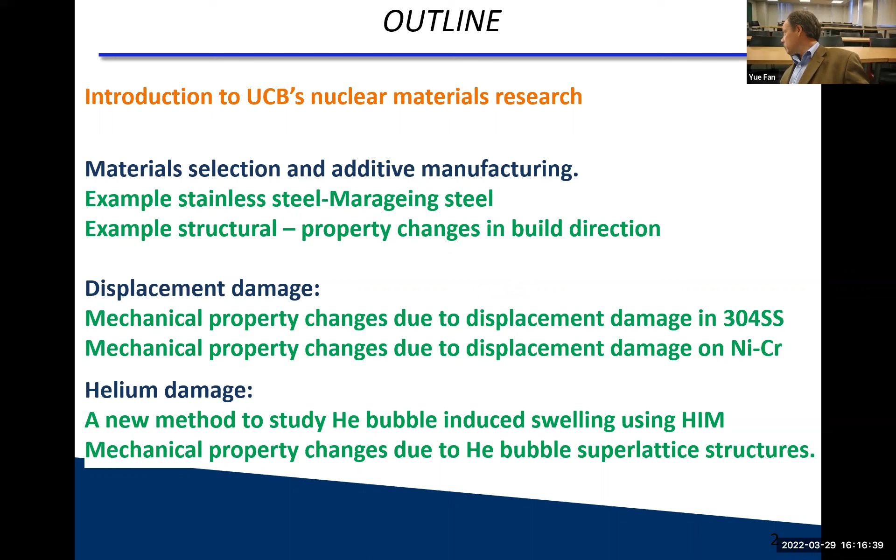So the Nuclear Engineering Department at Berkeley has this our faculty. We cover all areas of nuclear engineering, anything from thermohydraulics to neutronics to reactor design, and as well, of course, as materials.

Today we are talking about materials research in this session. Today I met with many faculty of mechanical engineering, nuclear engineering, as well as material science. So it was really a comprehensive day and meeting.

What we do in the nuclear materials section is two things really. We look obviously at materials in nuclear applications, but over the years we learned that what we learn from nuclear application has a lot of implication to non-nuclear things as well. So be it in the nuclear world, we work on materials for conventional reactors as well as advanced reactors.

But the material really doesn't care that much how it's used. And many lessons learned also go to non-nuclear applications, including composites for aircraft engines, since we have the same or similar composites for nuclear applications. Coatings for tooling are the same coatings people consider for cladding, and so on and so forth. So even plasma research you find in fusion actually finds application in semiconductor applications just the same.

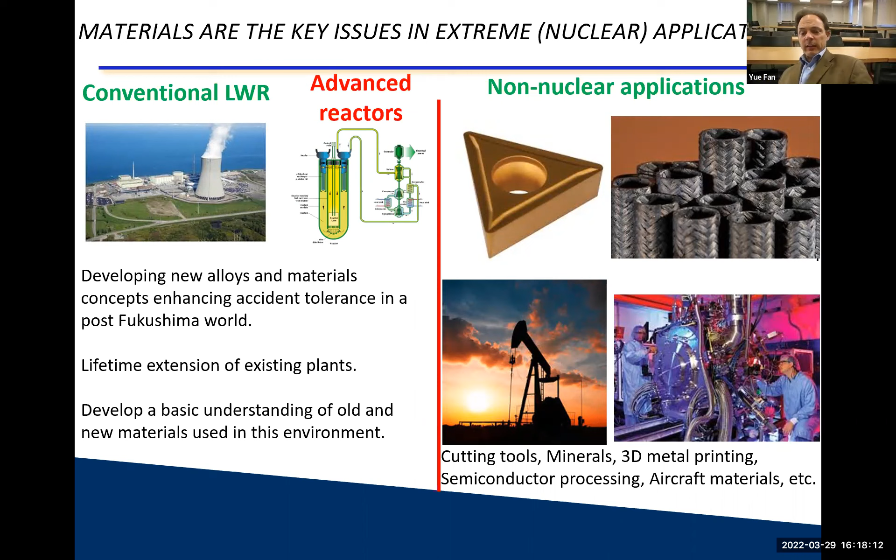So therefore, for us, it's really about materials being the issue in extreme applications. Harsh environments and the associated materials challenges need to be addressed.

Essentially, we say that every engineering design can only be as good as the material it's made out of. If you're a mechanical engineer and you don't have the right material to build it out of, your design will stay where you put it in the first place, which is on a computer or on paper, and it will never be realized. So you have to have the material to do that.

In my research team, we look at mechanical properties, environmental degradation, as well as fabrication and alloy development of materials. I'm going to talk a little bit about this first, because particularly here in mechanical engineering there may be some interesting takeaway things. But we also then look at changes due to temperature and radiation, mostly in regards to mechanical properties. I'm not going to talk about corrosion today, but if anybody is interested, we can talk about corrosion as well.

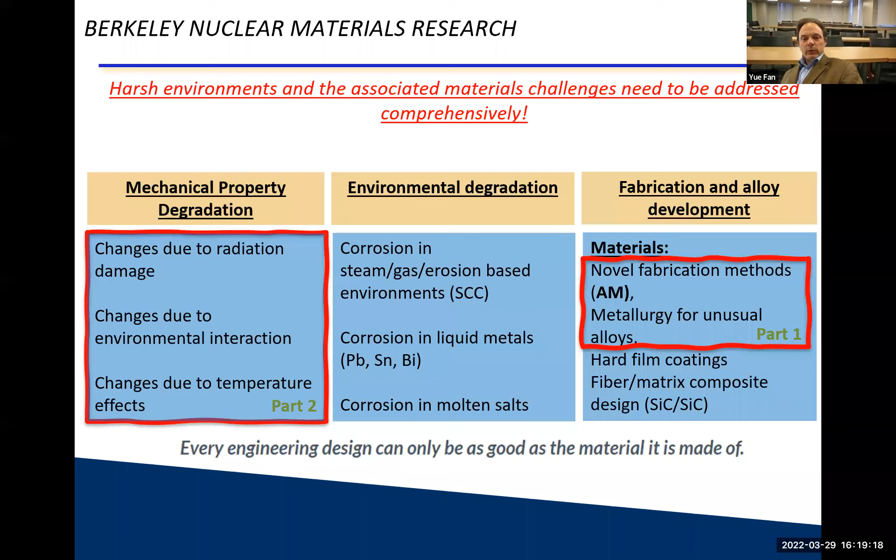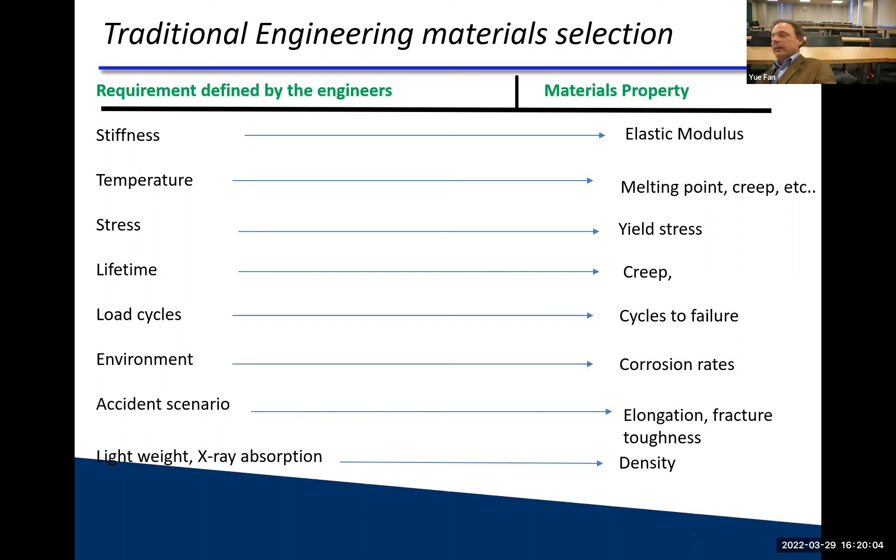Okay, so first chapter, so to speak, is materials engineering, material selection for nuclear engineering applications. So if you're a mechanical engineer, you start with your design, and you come up with a set of criteria: temperature, stiffness, whatever is your requirement, and you assign it a materials property - creep property, strength, elastic property. And if you're a mechanical engineer who is materials inclined, you learn that you can go to Ashby maps and select something of your liking that you think is appropriate for your application.

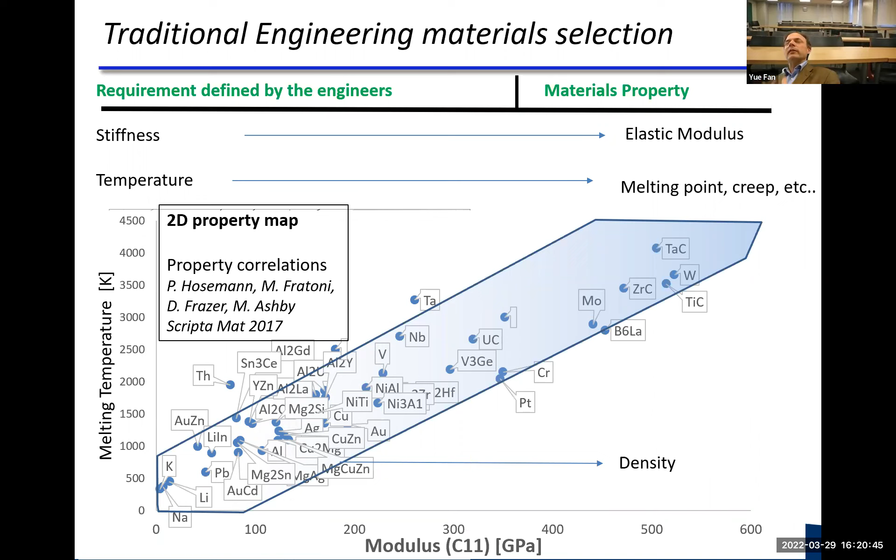If you do that and you plot interesting properties, what you find is many properties are related to each other. For example, melting temperature and elastic modulus are related, and there are trends along those lines - higher melting temperature usually means higher elastic modulus, etc. And that's not really a secret. But what is interesting is, if you're throwing in the nuclear application, you start to see that the intuitive relationship between these properties goes away.

So it's the same plot of various different compounds, and the size of the sphere now represents the nuclear cross-section. You can see there's no real trend anymore. The modulus and melting temperature still have a trend, but the nuclear property has no trend associated with any of the other ones. That makes it a little harder to do your material selection process.

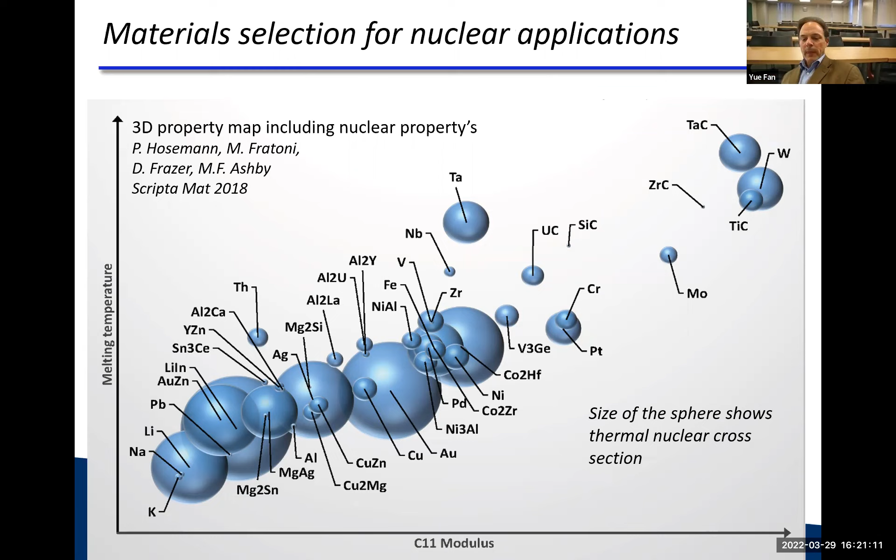So if you think about it in your application, particularly nuclear, usually you design for mechanical property, some chemical property - be it corrosion, you may design for physical property like density, or thermal conductivity maybe in reactors. Now you have to design for a nuclear property too, which keeps your design space very small. So you have a very limited design space in nuclear applications which fulfills all these requirements. Now that leads to the question: can you overcome this by maybe some creative engineering or creative manufacturing?

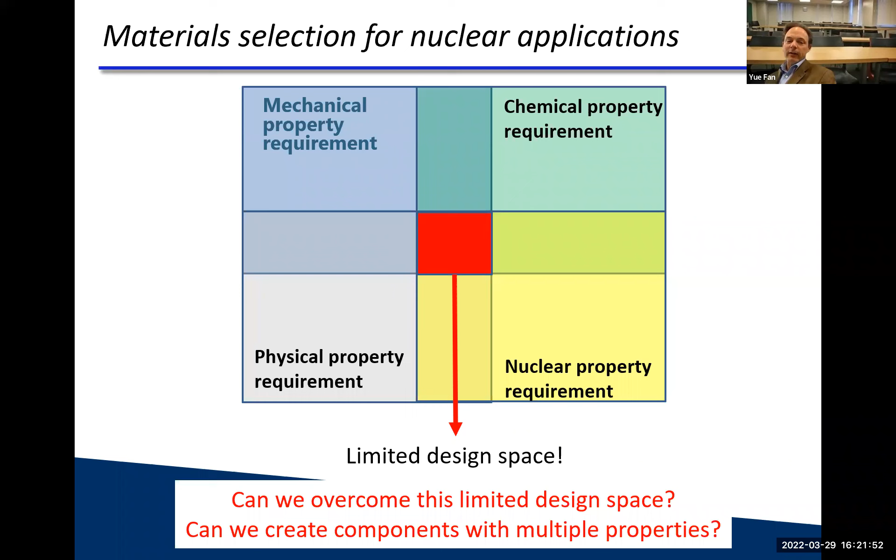As a first example, I want to show you - it's not that new anymore, obviously. As you can see, we started doing this in 2016, so that's quite a while ago. We look at 3D functionally graded materials - can you do 3D printing by changing the composition and the property at the same time? We borrowed this a little bit from welding, as most 3D printing does. So you have alloy 1 and alloy 2, and usually people make these dissimilar welds by building what's called a black and white weld, where you build up your transition. But can you do the same thing in 3D printing?

So here's a design of some part conventionally. Here's maybe a 3D printed version of this. But can you assign different materials and different properties to different parts of your part? And can you create, instead of 3D structures, maybe 4D structures by changing this material? And of course you can. So I'm going to show you a couple of examples of that.

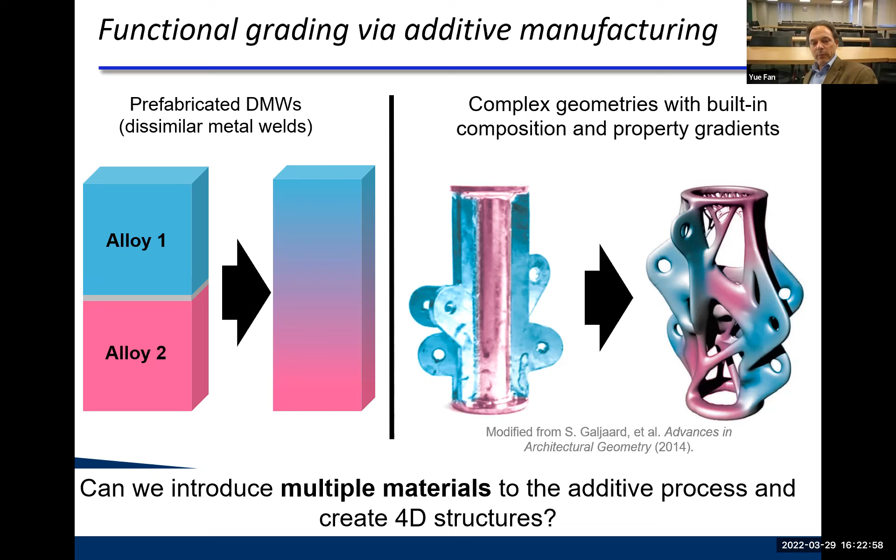The way we do that is laser 3D printing, where you have a powder feed and a laser, and you melt the powder as it comes on, and you build layer by layer. Can you change the composition along the way? Of course, your process parameters change, your materials powder changes, the chemistry changes, the geometry may change, the laser parameters may change - you have a lot of changes along the way. So you have to really figure out how to do that in this instance.

Here's a survey, and obviously I don't expect anybody to read this. It's from a review paper last year, where we plotted what people have done in the literature - austenitic stainless steel to titanium, austenitic steel to austenitic steel, and so on. All kinds of different materials plotted against all kinds of other different materials, looking at what gradients people produced over the years and where the pitfalls are. All these acronyms say that you may have poor solubility, which may lead to embrittlement, or a very different thermal expansion coefficient, which may lead to cracking, and so on.

So all these different material combinations have all their challenges. In our research, we focused on only a few of them, and I'll just show you one in the interest of time.

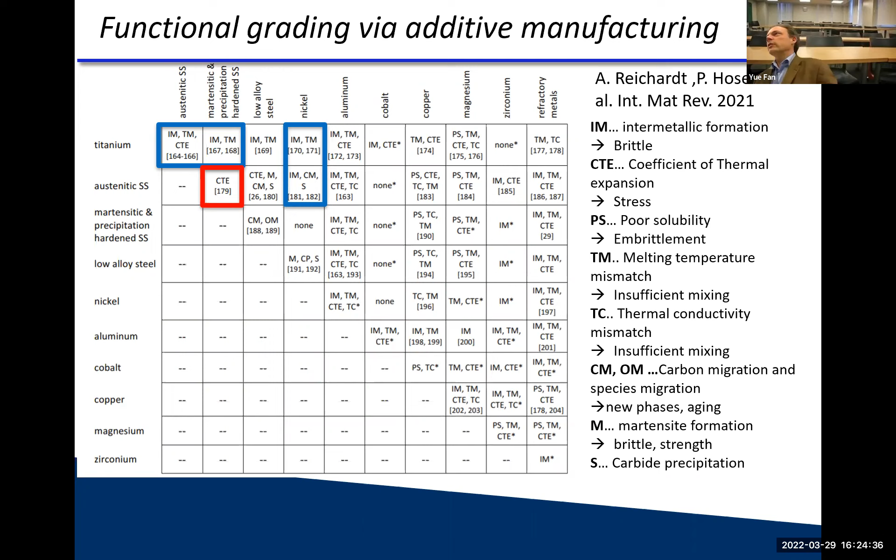I'm going to show you a martensitic precipitate hardened material joined to an austenitic steel. Mar-aging steel is a very strong, heat treatable material with around 2000 megapascal yield strength, while stainless steel is corrosion resistant but pretty weak.

So can you make a transition from one to another without too much trouble and use it for your design? That particular project was inspired by JPL, who were interested in doing something like that for space vehicles, because there's very limited space and you can't make too many connections. It's very interesting to see if you can grade something.

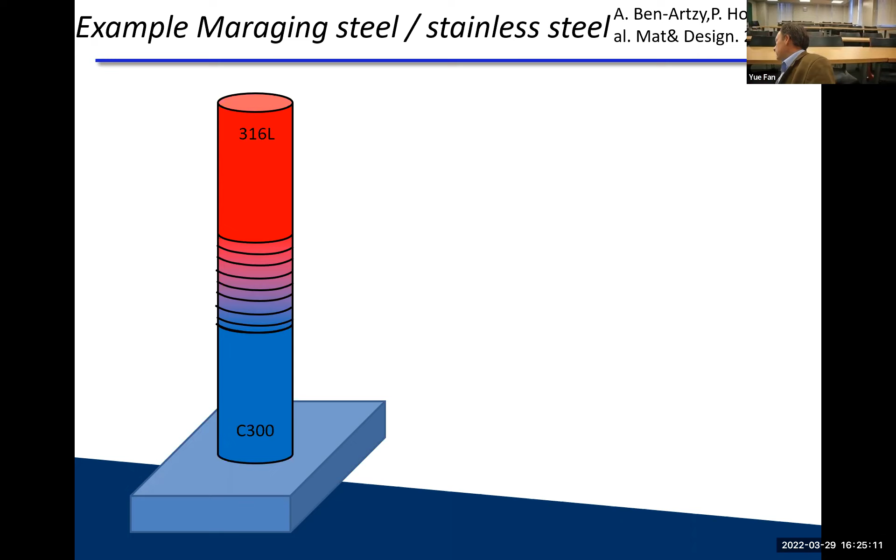So we printed mar-aging steel C300 to 316 stainless and did layer by layer a gradual change of the composition. As you can see, it's over 100 layers, and you change the composition along the line. The powders were pre-mixed, so the composition changes gradually. Okay, so far so good.

It's important to know what the phase diagram looks like when you do that, because you can end up with multiple phases potentially. Here we plot the iron, chromium, nickel phase diagram, and we want to go from a 316 stainless steel to a mar-aging steel. We chose a straight line.

Of course, you could choose other directions. You could increase the nickel content and reduce it again, or take some other path if you find intermetallics along the way. In the titanium world, that's sometimes what people want to do, to avoid intermetallics, but in this instance it's not necessary.

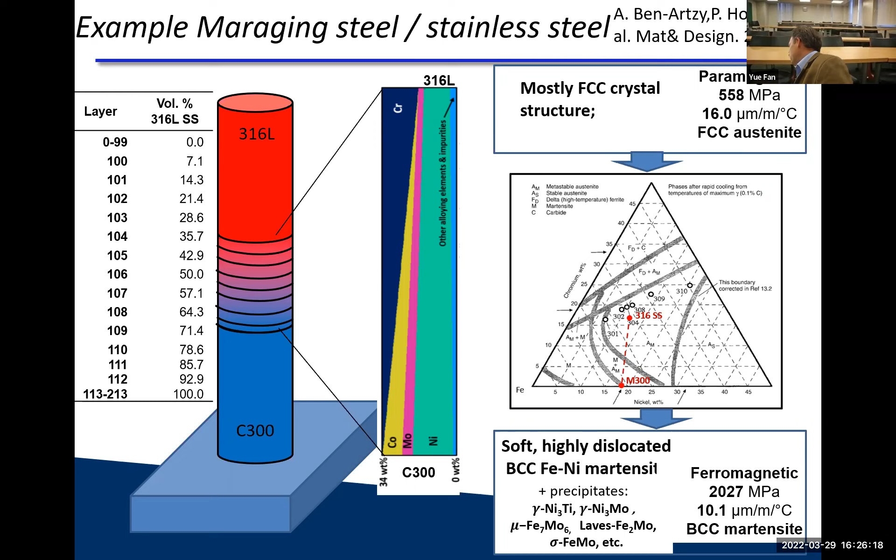However, you're still joining a very different FCC material to a BCC material, something with 500-something megapascal strength to 2000 megapascal strength, and very different thermal expansion. So it's a reasonably different material.

So when we print these things layer by layer, afterwards we do a cross section and look at the EBSD in this instance. Blue is BCC, red is FCC, those are the orientations. As one may expect, going from a BCC to an FCC material, you get a mixture of the two, and somehow in a gradual way.

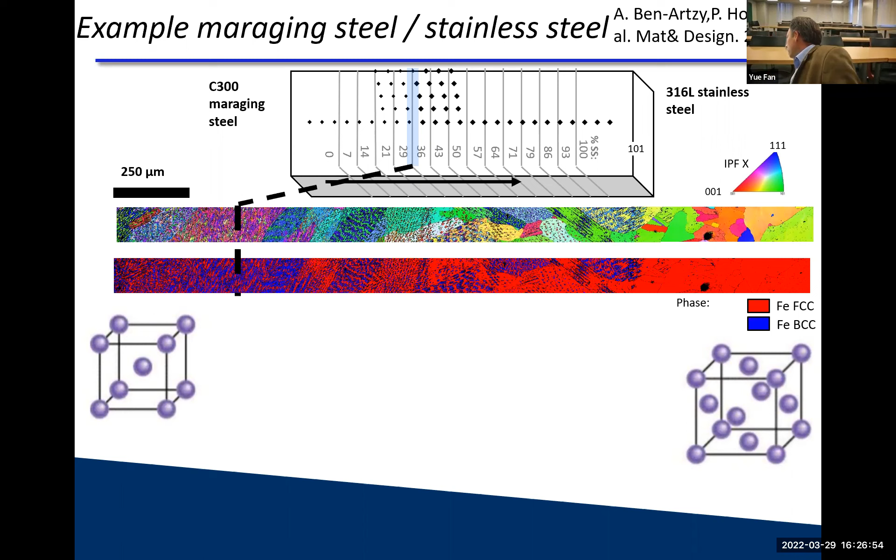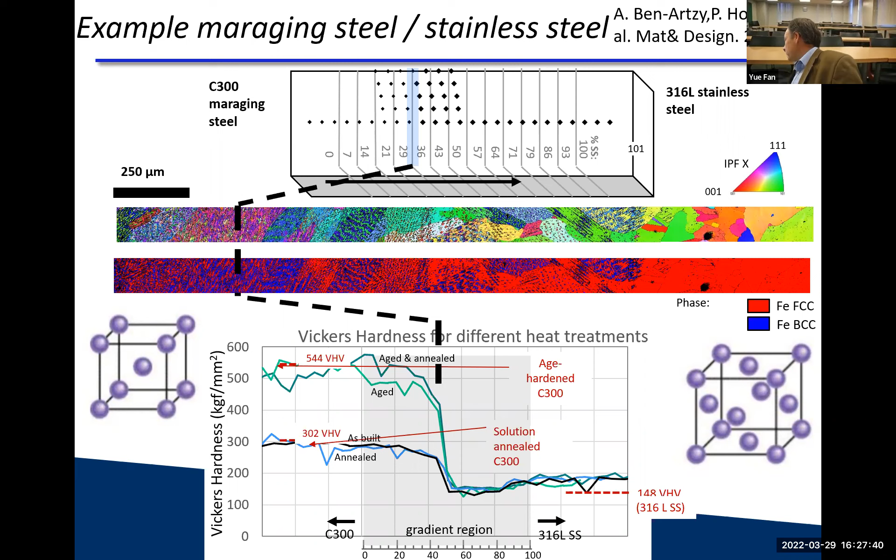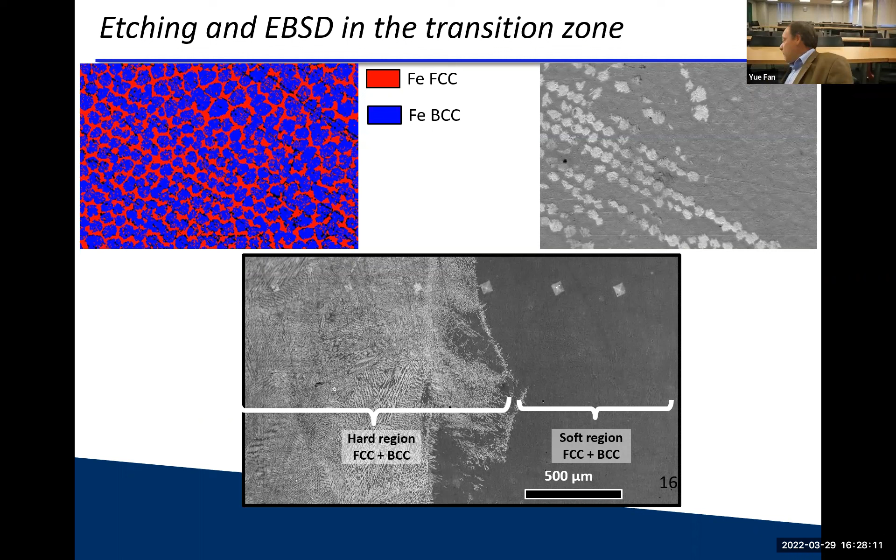In the TEM, however, we did see that in the hard region there are a lot of intermetallic precipitates, but not so much in the other region. So what seems to have happened is that in the hard region we form a lot of intermetallic precipitates that use up some of the alloying elements, therefore not contributing to corrosion resistance, which allows it to etch. Versus in the soft region, we don't form those intermetallics, and therefore it also doesn't etch because it stays in solution.

So that's one example where, when you set off to do a gradient, you have to be really careful that the gradient is indeed a gradient and not a sudden transition in some way. That's something to keep in mind when you're doing this kind of grading.

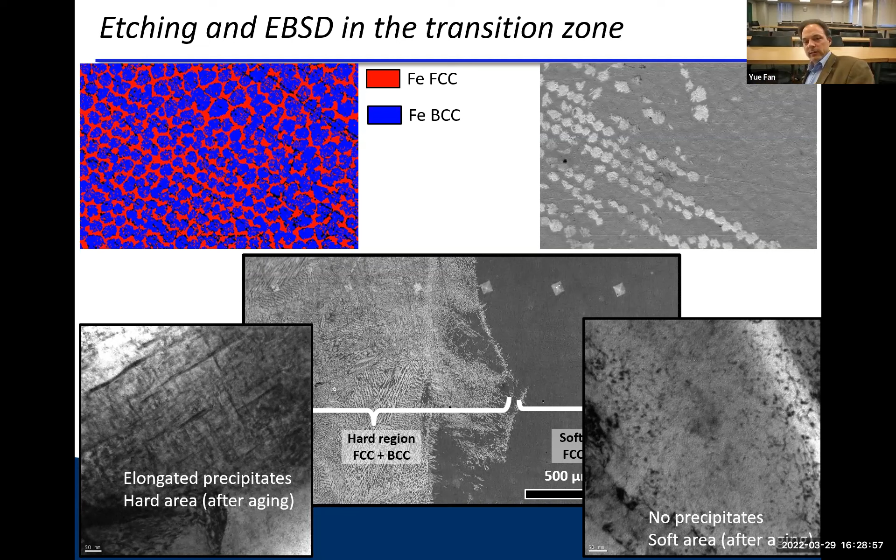Okay, second example on 3D printing is also a gradient, but in this instance it's a structural gradient. We look at P91 or T91 ferritic martensitic steel. When you build something, you have a bottom part, a middle part, and a top part, built layer by layer, as we showed earlier in this cartoon.

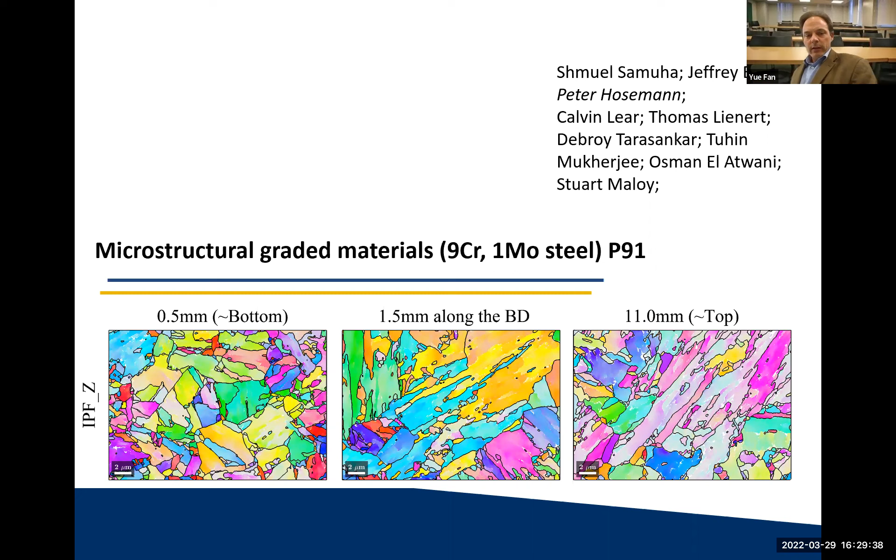This is the EBSD. Doesn't look terribly different—maybe this has larger regions and this has smaller regions, something like that. But there's a lot of stuff happening within these regions. They're not particularly homogeneous; there's a lot of structure in these things. So let's look at that.

Professor Debroy from Penn State did a beautiful modeling where he let the laser beam go across, calculates the thermal temperature as a function of where the laser beam is, and then calculates the thermal history layer by layer. Remember, you do layer by layer, so the next layer treats the layer underneath, and the next layer treats the two layers underneath, and so on and so forth, and they see different thermal history.

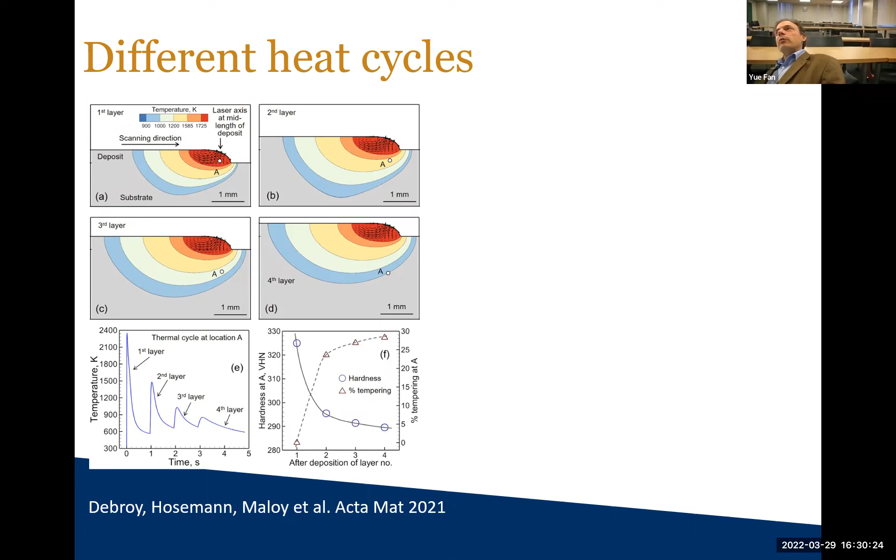And so now, because you have different thermal history, you also have different heat treatments for these heat treatable steels. Therefore one would expect a gradient of some sort with different heat treatments from top layer to bottom layer to change the property. And so this is the product, layer by layer.

What's interesting is if you look at the top layer versus the bottom layer, we see a very different yield stress, ultimate tensile stress, and yield stress change as a function of which layer we're looking at when you do tensile tests along the way. The top one has only seen one heat treatment, maybe two, and the bottom ones have seen many, many heat treatments.

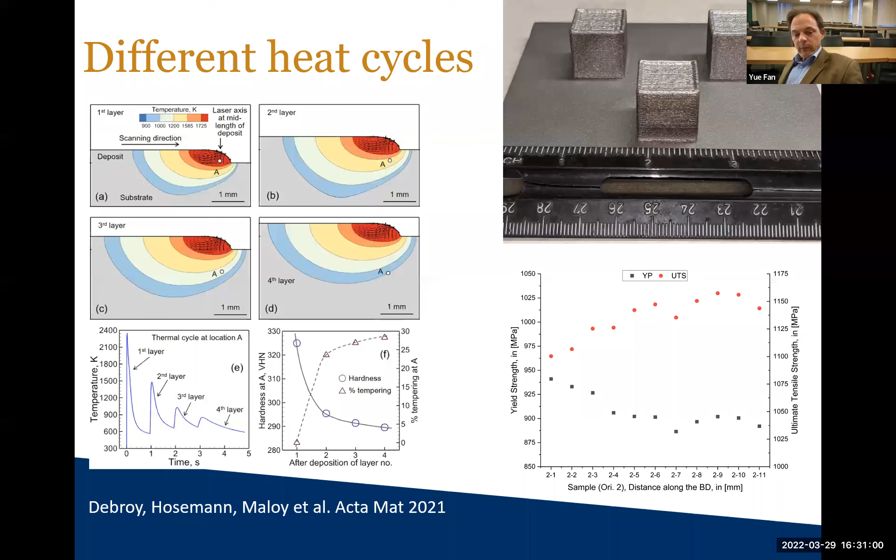So that's it. The question then is, okay, what does the microstructure look like? Shmuel, a postdoc working with us, is really good with EBSD. So he records all these different layers, the EBSD microstructures, and uses them to calculate packet sizes, grain sizes, and other microstructural features from the EBSD.

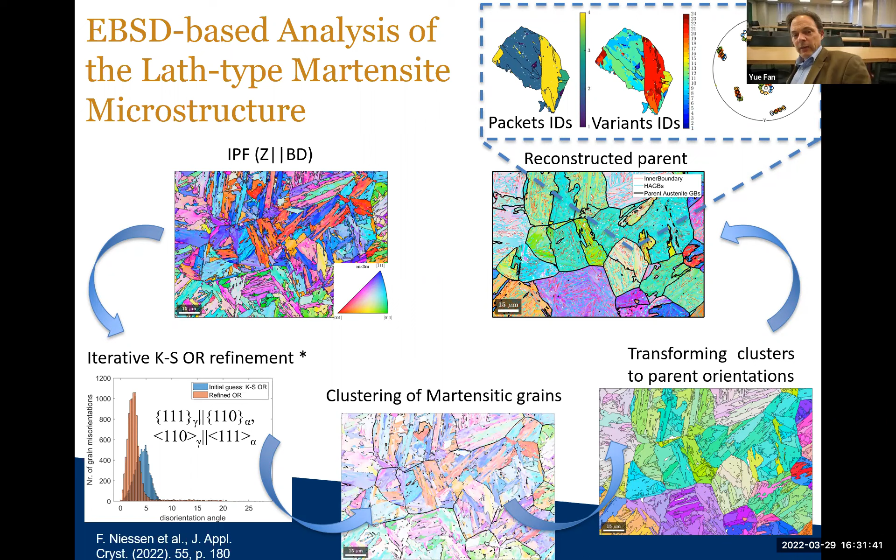He calculates the cluster densities, the lath dimensions, all these things, and can reconstruct what this microstructure looks like when you actually deconstruct it into grain sizes. What you can also get out of this is the geometrically necessary dislocations in these microstructures. What we see is there's a delta ferrite grain or phase here at the martensitic phase.

All the red here is the highlighted dislocations. Now what you can plot is the dislocation density as a function of distance along the build direction, but also the tested yield stress. Of course, if you have a higher dislocation density, you get a slightly higher yield stress, and so on.

Now, of course, you have to consider how much delta ferrite phase you have and what the rest of your microstructure looks like. If somebody wants to see the rest of all this put together, I can show you this later, but it's really remarkable that as a function of build layer, you can change the microstructure, get different properties, and control that in a targeted fashion.

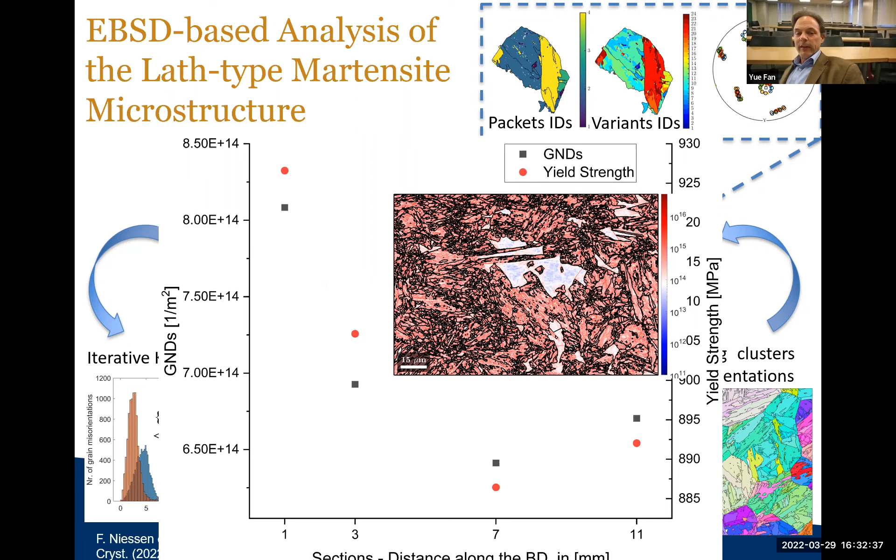All right, with this, I would like to stop with the additive components and talk a little bit about radiation effects in materials and mechanical properties.

And I'm rushing for people who came later because we lost 15 minutes at the beginning due to computer issues. So, all right—let's look at materials in the nuclear environment.

Again, remember what we said earlier, that this is an extreme environment—it's a coupled environment. It's not just radiation; it's mechanical, temperature, and these other things as well.

Your energetic particle comes in, displaces your atoms, and then you create knock-on cascades, which displace all the other atoms around. Of course, most of those atoms jump back at the end of the day, and you have a sort of healed lattice. But you did have these atoms being displaced, and therefore the dose we use to characterize nuclear materials is displacements per atom—the dose unit.

So at 1 dpa, 1 displacement per atom means that every atom on average has been displaced one time from its original lattice site.

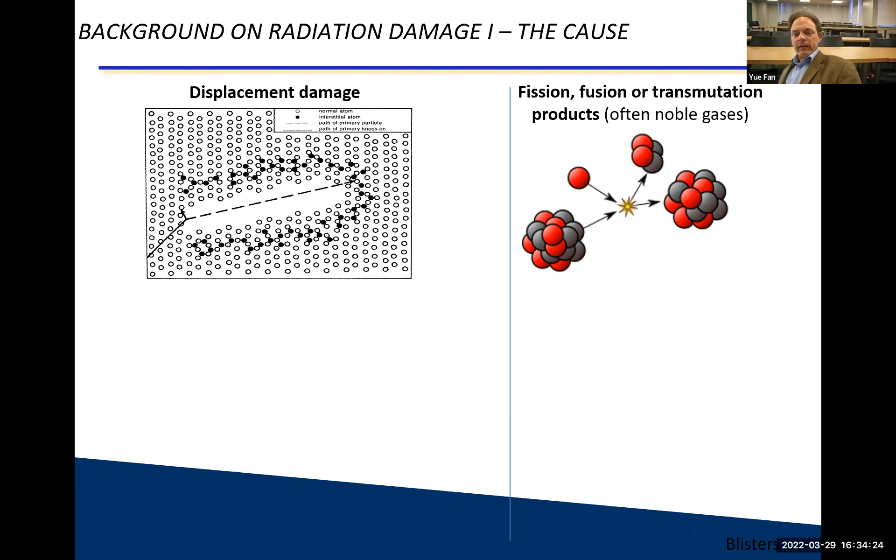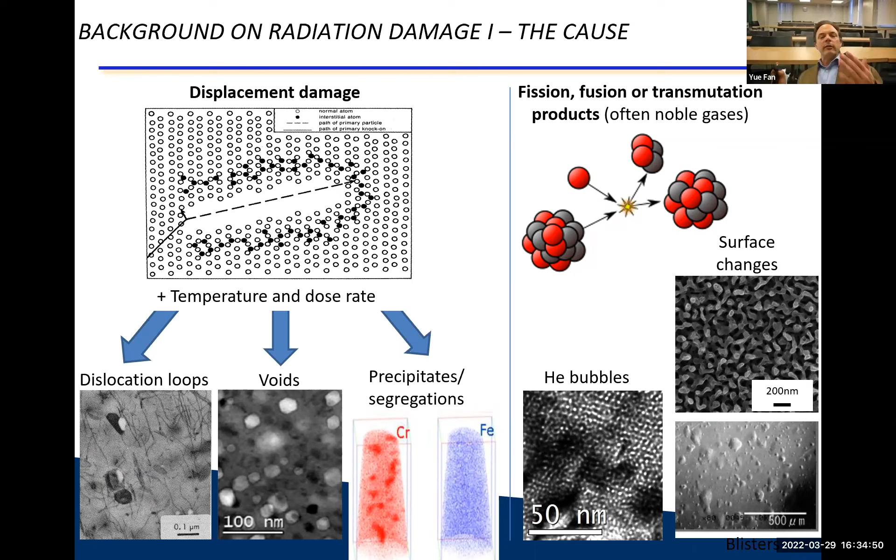The displacement damage leads to dislocation loops, maybe voids, maybe segregations, precipitates forming, these kinds of features. Versus transmutation products or gaseous products oftentimes can lead to, in the fusion world, fuzz formation on the surface, or helium bubbles building up in the material, or blisters forming underneath the surface. So those are very different phenomena that can happen, right?

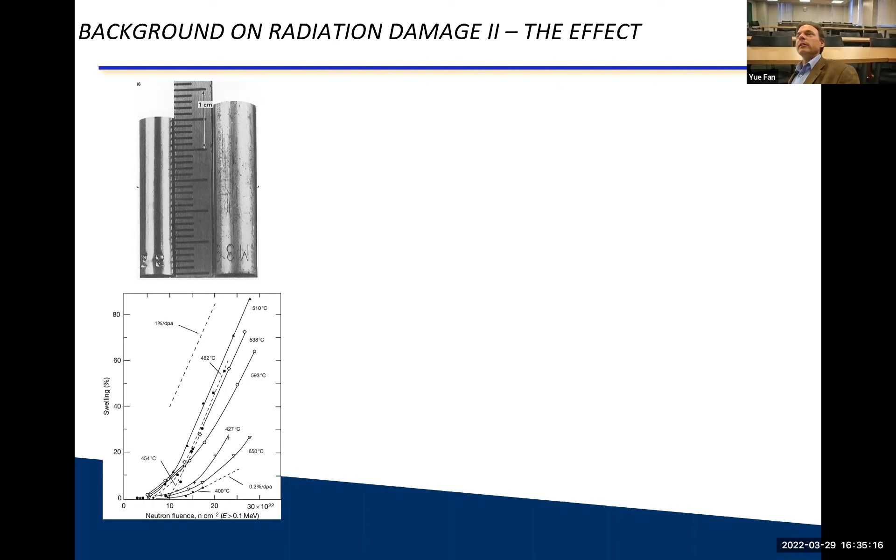The result of this is that your material may swell, so you can have a volume change before and after radiation, and tens of percentages can happen. Of course, if you have a component, imagine a screw or a bolt that changes its length and diameter just dramatically, that's awful. You can have cracking.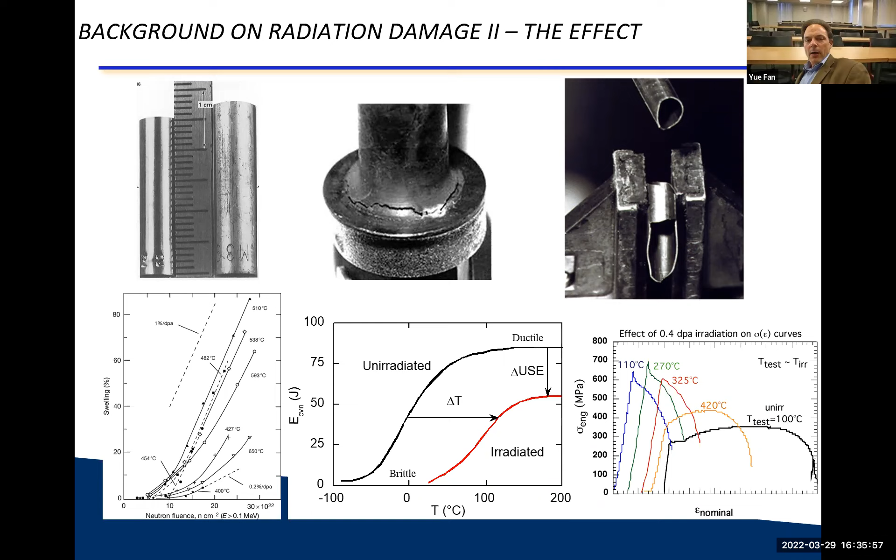So those are the effects of this. And the cause of this, as I mentioned, are loops, voids, stacking fault tetrahedrons, precipitates. Sometimes you can also get the dissolution of precipitates. When you have strengthening phases like gamma prime, gamma double prime phases, when they get irradiated, they can disappear under dose, so you can actually shoot them back into solution.

So you can actually have both, the formation of precipitates as well as the dissolution of precipitates, and helium bubbles. For the remainder of this talk, I'd like to separate defects into ones that may be dissolved by mechanical deformation and defects that usually won't be dissolved by mechanical deformation.

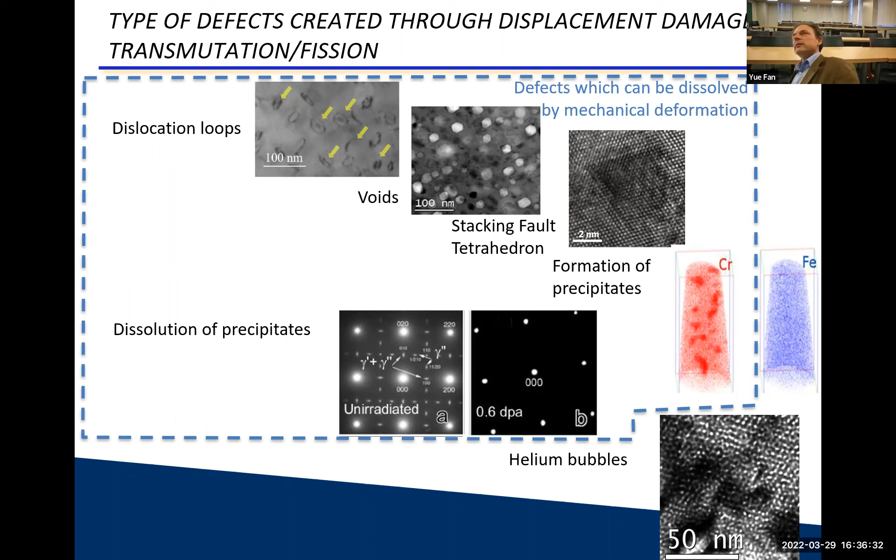So a stacking fault tetrahedron, if a dislocation loop is there and a dislocation comes, they can be absorbed by those. That leads to different mechanical performance than, for example, helium bubbles, which may change their structure but won't actually get dissolved.

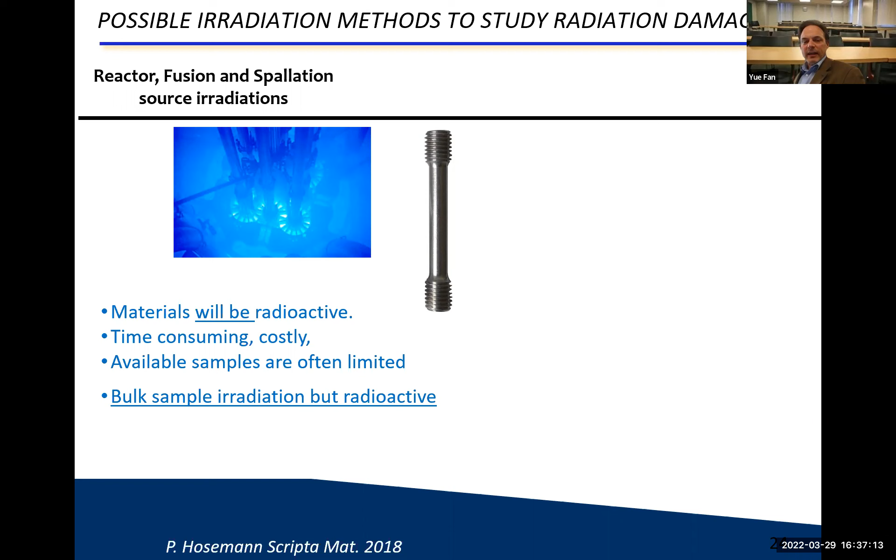Now, when we have our material, we want to irradiate it. Usually we have two ways to do this. We can either have a reactor irradiation, which leads to macroscopic dog bone samples and what have you. However, they're going to be highly radioactive, and therefore we would like to do smaller samples to keep it safer.

But we can also do ion beam radiation. You have, of course, one of the world's premier ion beam facilities here, I'm well familiar with this. With ion beam radiation, your penetration depth is limited, so you have to also go to small scale mechanical testing, because otherwise you can't test the material in that volume.

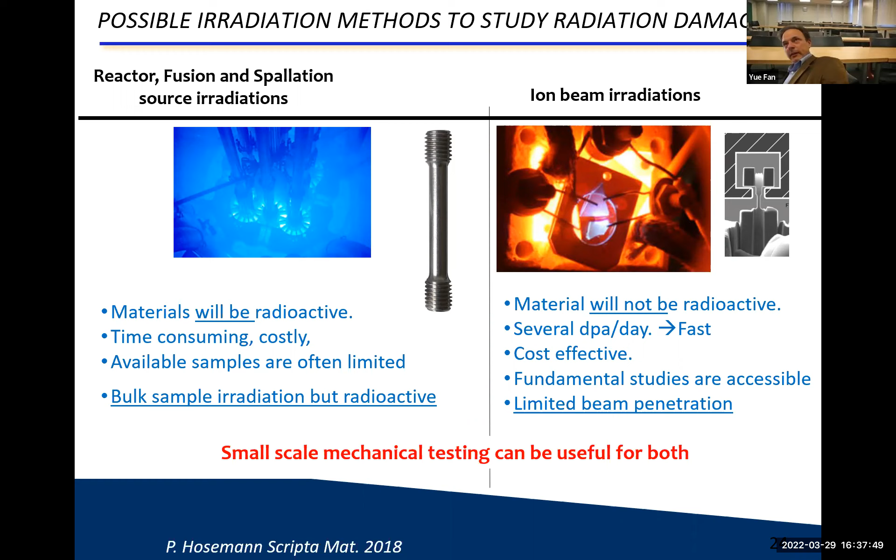In either one of those applications, small scale mechanical testing can be useful for both, and so I'm going to show you examples of small scale mechanical test data of these phenomena we just discussed.

As the first case, I'd like to talk about radiation damage on 304 stainless steel. In fact, that sample was irradiated here in Michigan and was studied in Berkeley. It was irradiated with 2 MeV protons, which penetrate about 20 microns deep into the material. Here's the dose profile shown, and where the protons end up at the end.

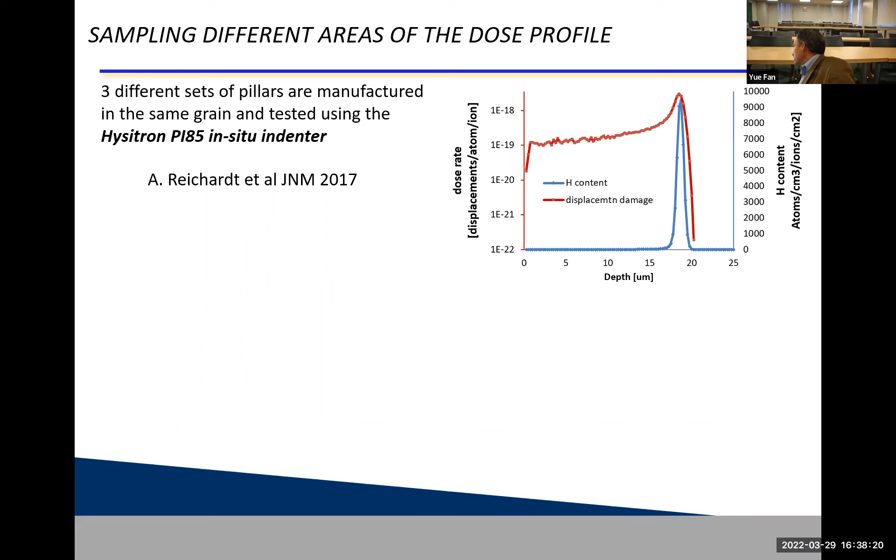So 20 microns is all the material you have to work with. The beam came from this direction, and this is how deep it penetrated. We looked for a large grain which can accommodate many mechanical test samples, so each test pillar in this instance is in the same grain as its neighbor, so orientation doesn't matter, it doesn't play much of a role in this instance.

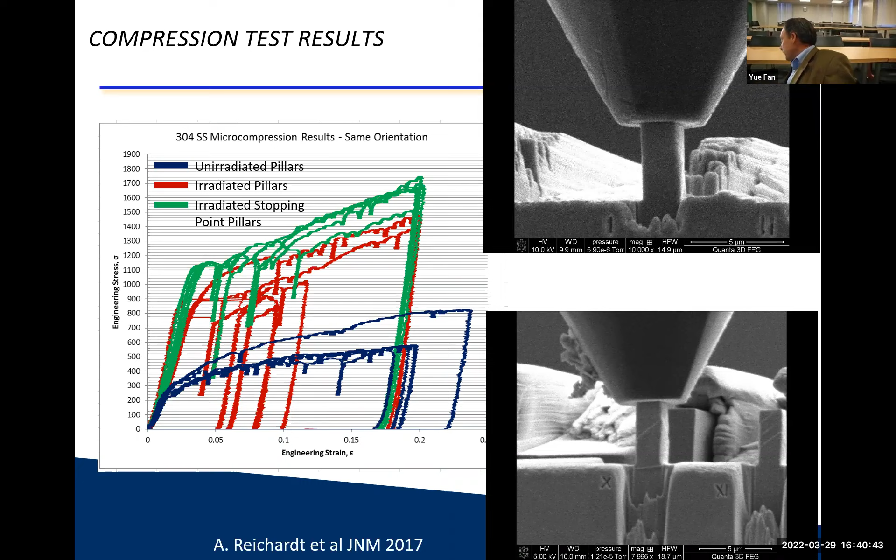So we look at not irradiated. In the not irradiated case, we see many slips, all parallel, since it's in the same crystal. But in the 10 dpa region, maybe one, maybe two of these things, and all the deformation happens only there. It's one clear shear. In the stopping peak region, we see a little bit of both, but our stopping peak is 1 micron wide, and the rest of the pillar is like 2-3 microns wide. So it mixes both. Unfortunately, it's not that localized.

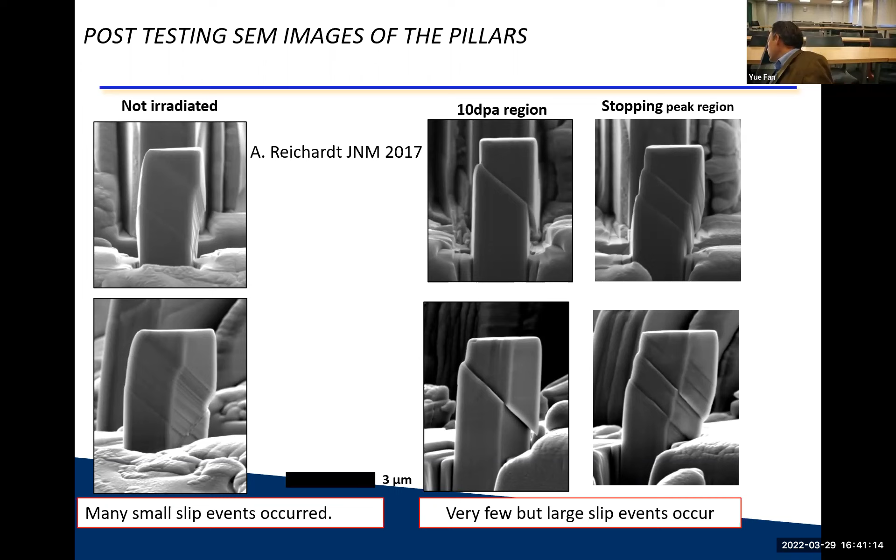So when we look at the load drops, what we actually look at is each data point, and when an event occurs, the spacing between the data recorded changes a little bit. So you can use it as a go point. At that point, you have a plastic deformation. And then you map out or calculate the area underneath the force displacement curve, which tells you how much energy went into this particular event.

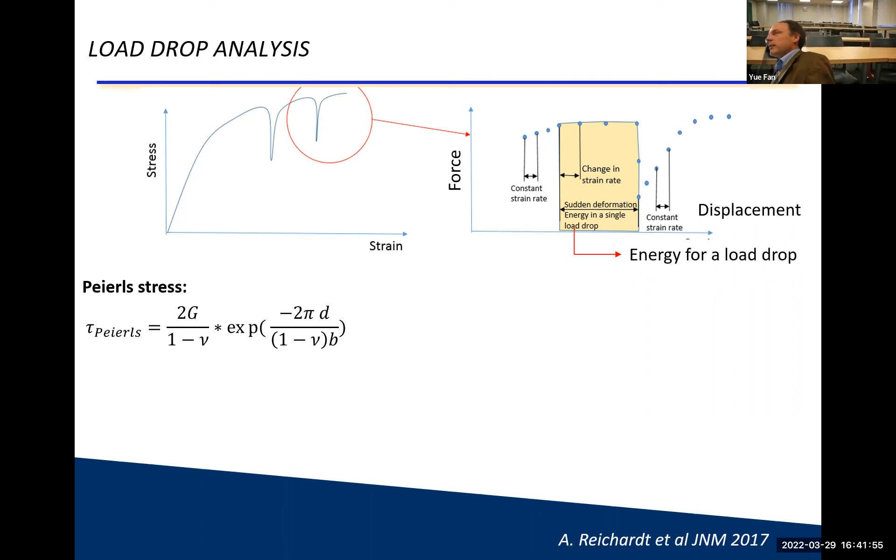Force over distance is the energy associated with the load drop in my stress strain curve. And so then I use this energy and put it in correlation to the Peierls stress, which is the stress it takes to drive a dislocation through the lattice. And then I take my Peierls stress and multiply essentially with the dimension of my pillar and the surface energy term, because you create new surface at that point. And that's the energy it should take me to create that load drop.

So this is what I measure, and this is what it should be. And when I divide one versus the other, I can calculate how many dislocations take part in that event, because one dislocation causes a certain amount of deformation. So the total energy divided over the energy of one dislocation gives me the number of dislocations. And the number of dislocations times Burgers vector should give me the slip step height.

When I do that, I calculate that in the non-irradiated material, I see a slip step height of maybe 50 nanometers, maybe 100 nanometers, depending which load drop you pick - they're a little bit different. But in the irradiated case, I see 800 or 900 nanometer slip step heights, which is in correlation with what we see here in our SEM curve. So that's consistent. Now, why does that happen?

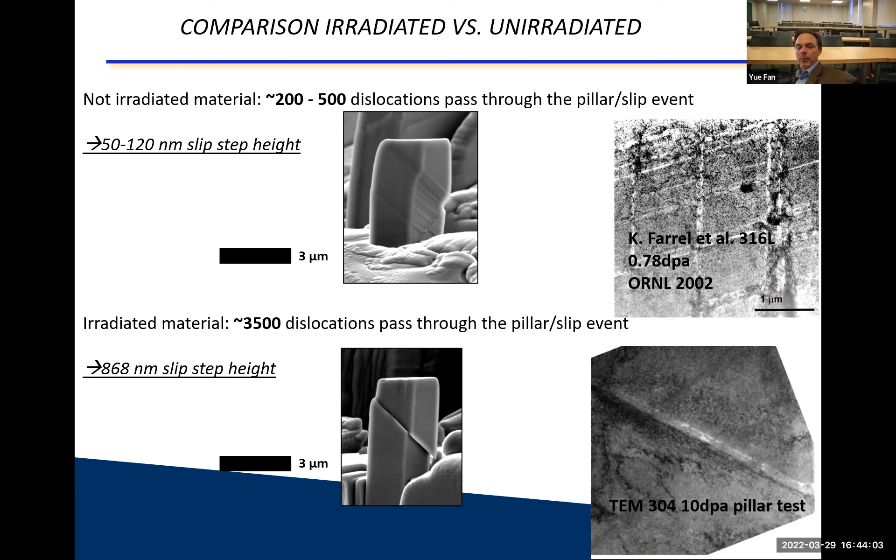This is not particularly new, unfortunately. This has been shown in reactor-irradiated materials that deform through these channels with no defects left in them. That's because these dislocations clean out the area and therefore leave these traces behind. However, any subsequent deformation will be in the same channel, and therefore all the plasticity happens in this very narrow gap, which then leads to these load drops.

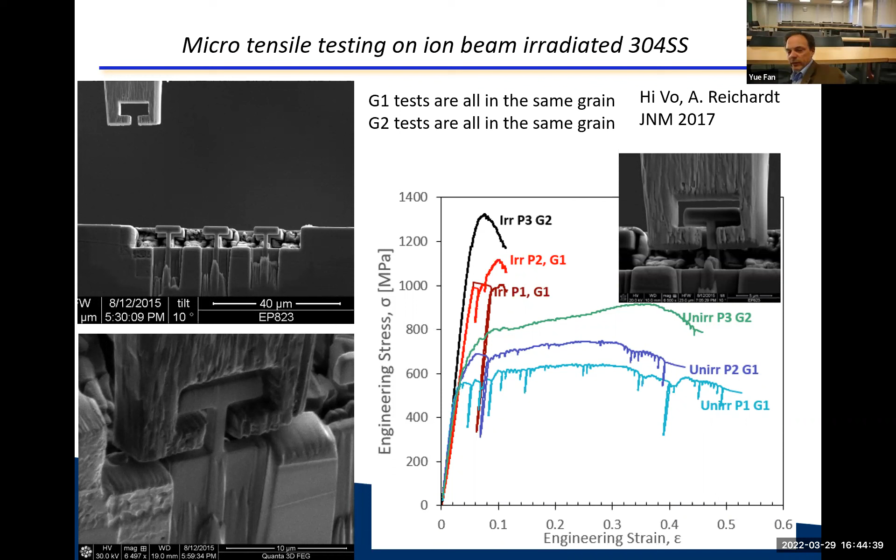You can do the same thing in tension. So this is stress strain - again tension, unirradiated, but in different orientations. This is grain 2 and this is grain 1, so different orientations not corrected for Schmid factor. But you can do the same thing, and irradiated versus unirradiated look different. We have a reduction in total elongation in the tension case, just the same way as one would expect of irradiated material in this instance. So tension and compression do the same thing, and we see that happening.

Okay, another example of this is something from last year where we used these pillars again, but this time we actually look at ordered structures.

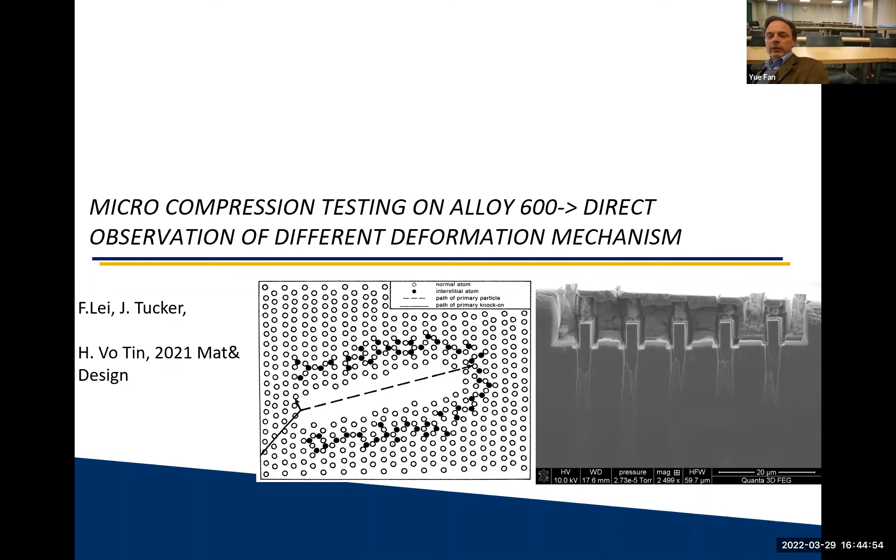So we look at a nickel chromium alloy, and nickel chromium, when it's aged, forms these long-range ordered features, precipitates if you will, but they're not real, they're long-range ordered structures. So you have chromium and nickel being on specific orders.

When we did this test, what was interesting was when we observed this, you see mostly slipping taking place. But in one orientation, we saw something different, which is not slipping. So in this movie, pay attention to a black band popping up at some point.

There's a black band here popping up at some point. I don't know if you can see it or not, but it just keeps growing. So there's a first event, and then there's this dark band here, and that band keeps widening. It's actually this band here, I think it's the same color, if I'm not mistaken.

And that's not slipping, that's twinning in that instance, right? So the material actually started to twin rather than slip. But it only happened in this one orientation, interestingly. If you do it in all the other orientations, it keeps slipping, except in the one orientation.

Now, it turns out that there's an orientation relationship between the long-range ordered feature and the host matrix. In almost all orientations, you can do that slipping and not change the stacking order, except if you apply the stress in one orientation, then you would have to create an anti-phase boundary. That costs you a lot of energy. In that instance, the material rather starts twinning than slipping.

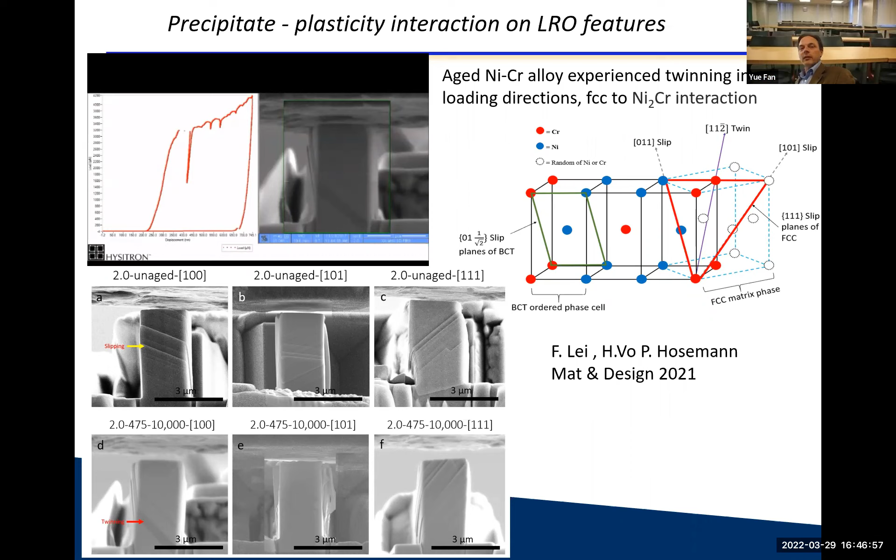All right, of course we do all this at the micro scale. Now let's do this at the slightly larger length scale, because at the end of the day we want to get bulk properties for our reactor. One challenge we have is people have been doing tensile testing using focused ion beam machining for the last 10, 15 some years, and our reactor, however, is in the millimeter length scale.

What's missing is sort of this stuff in between, the 100-ish tens of microns length scale. Because the question is, how does your nanomechanical performance relate to your macro performance? What is that relationship? And the truth is, it's really hard to get to that, because who can make a 50 micron diameter dog bone, right? That's the hardest length scale to make anything. It's too big for FIB and too small for anything else.

So we're really interested in finding out what is this relationship between yield stress at the nanoscale and the macro scale. And we know it's something in here, something like that. I don't know what it is, but it's something like that. And so we're looking at that.

In order to access this, we started to look at other ways of making these microstructures. So machining, of course, and EDMing is conventional. FIB we already discussed. Femtosecond laser machining is something we got interested in like 3-some years ago, and that has been very fruitful, really.

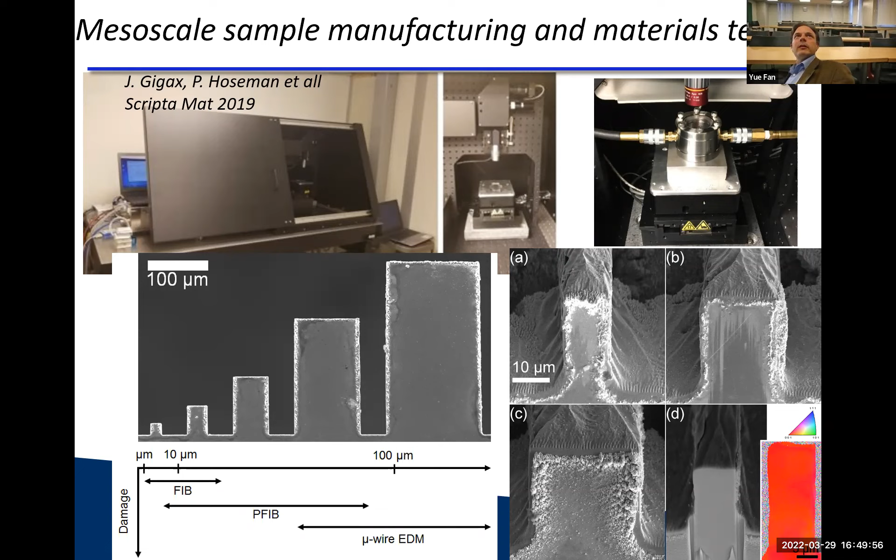Now, this is from 3 years ago or so, so by now we got much better at this. These were really the first pillars we made. But the nice thing is we don't see any kind of recrystallization. It's all one grain, it stayed that way and didn't really change too much. And if anybody wants to know the stress strain data to these things, of course we can discuss further, but I want to show you what the pillars look like.

Recently, we started to make more tensile tests. This is SSJ2 tensile geometry, 1.2 millimeters wide. They're the standard nuclear reactor tensile test samples. But now we use these very same ones and cut small samples in those bigger guys to really try to understand what's the relationship between sample dimension and property, since they're not independent from each other.

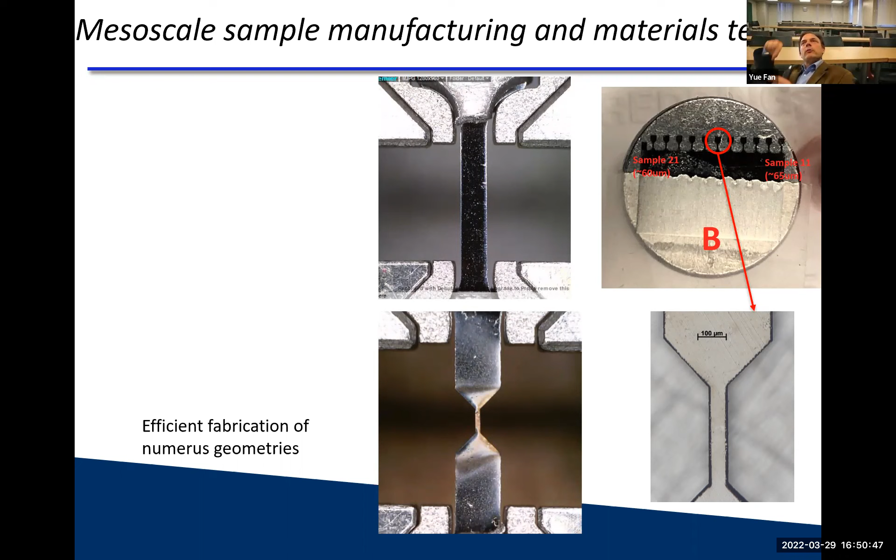That way we can guarantee it's the exact same material, because it was cut from the same piece. You can also do many of these dog bones on one coupon, like this, and pull one after another. Andy Minor just bought recently an automated tensile tester, so you can literally go there, grab one, pull, and come back, that sort of stuff.

And what I'm really proud of is something Jason, my student, did. He was able to actually make round geometries. So we put a lathe in the laser, so it's rotating, and now you have a laser lathe, which is non-contact machining on any material really, and it gets you pretty good geometries. This was again from two years ago, and now we're able to make those about half that size.

We also just did a test—I should have put that in—but did EBSD of the surface as is. So you can actually get an EBSD signal of that without FIBing if you get the parameters right.

With that, we are able to now test, for example, sample thickness versus yield strength, because we really want to know what that relationship looks like in the unirradiated case, and then irradiated—this is actually a 30 MeV deuteron irradiated sample. So yield strength versus sample thickness plotted, or ultimate tensile stress versus sample thickness, and those are basically those samples here, where they have different thicknesses and the same XY dimension, and we cut them down thinner and thinner.

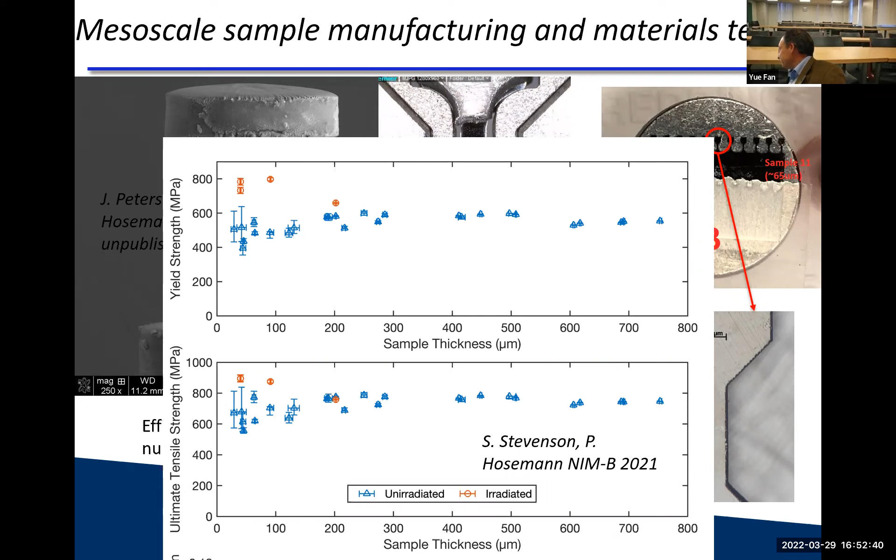How much can I go this way and still get valid data out of it? What we can see is that 30 MeV deuterons, at just a fraction of a dPa, already changed the property in this instance—the yield stress is higher in the ion beam irradiated material, but at the same dimension. So that's where it's heading at this point.

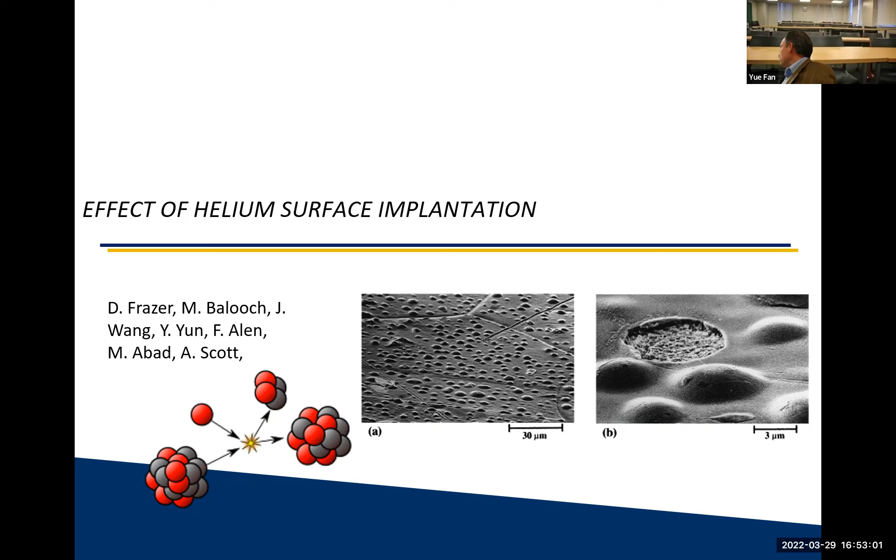The last chapter I want to talk about is helium implantation. As I mentioned earlier, we talked about displacement damage, but there's also transmutation damage. With transmutation damage, you create helium in materials and on surfaces, and here it is, for example, blister.

The way we do this is we have a helium ion beam microscope that implants helium in like 10 by 10 or so microns. You scan, you raster like a FIB or an SEM, and then on the same grain in the same region you watch swelling with AFM, you do nanoindentation and watch the hardness, you do TEM and watch the TEM, and get all that out of a 10 by 10 micron region. Very effective to get many doses in the exact same sample.

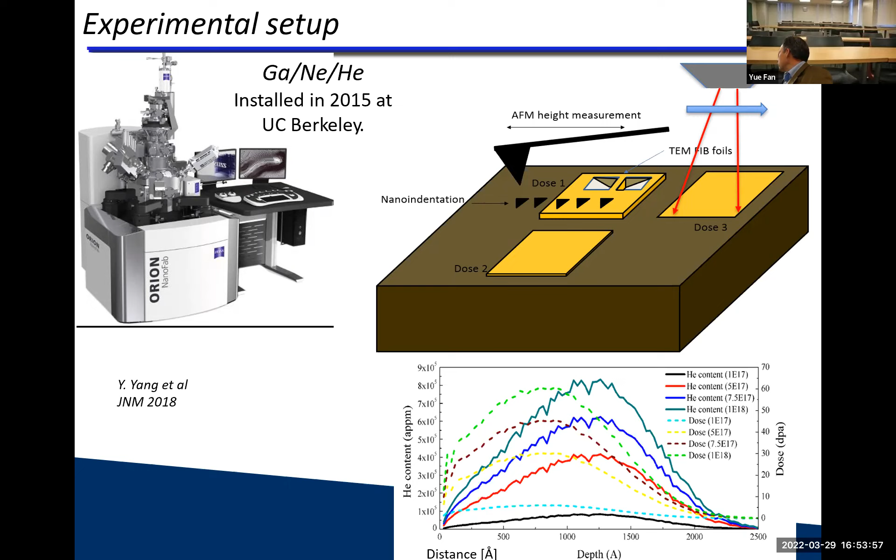This is what the dose profile looks like if you do 25 keV helium, like in this instance, not of course accounting for diffusion—diffusion smoothens that out some more. But we usually do between 1 times 10 to the 17 and 1 times 10 to the 18 helium ions per square centimeter, so a pretty hefty dose, which leads you to about 40 or 50 dPa of displacement damage.

So let's see what that looks like. Here's 1 times 10 to the 17 helium ions, and 1 times 10 to the 18, in copper. We see, of course, with the AFM, the rising of the surface, and at high dose, like in this instance, we see these features popping up, which are actually blisters, which we're going to see in a second.

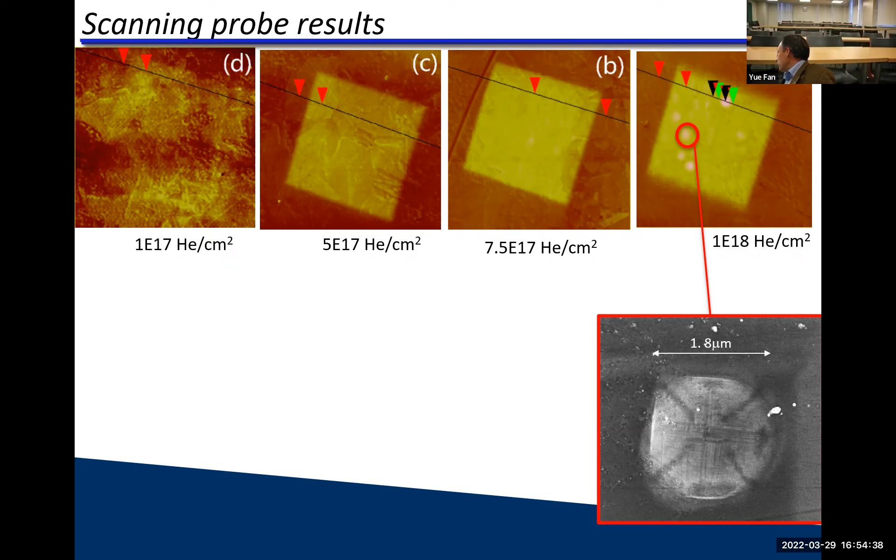So one of those features actually looks something like that—these are like little domes popping up. An interesting feature to note: they actually have this X shape, and then a second X in there, so two X's total. The dark X comes from the fact that this was a single crystal copper, and when it bends, you end up getting channeling contrast in specific crystallographic directions, which is what we see here. These, however, are probably slips from the surface because it had to undergo some plastic deformation.

When we plot height versus distance, we can measure height change as a function of distance, and then plot swelling as a function of dose.

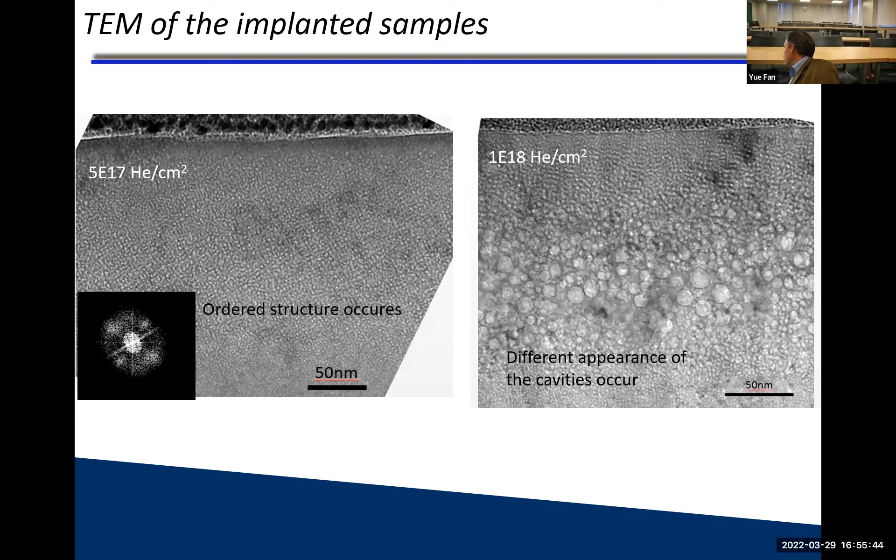In the TEM, we see beautiful helium bubbles building up in the material. In this instance, we see an ordered structure of helium bubbles. At this dose, the fast Fourier transformation shows peaks, so there's an order to these things. But if you go too high in dose, you lose that order, and it looks more like bubble bath.

So you have just too much helium gas in that instance. And so we can now plot swelling as a function of dose. In copper, single crystal or polycrystalline, our grains are so large that they're always more or less single crystals, so it really doesn't change a whole lot. We look at that swelling rate as a function of dose.

But we also compare the TEM. So the other thing we compared is we count the helium bubbles and say, okay, the helium bubbles are the empty space. From the TEM, I calculate that we should get a 97 nanometer height increase or 39 at this dose. And from the AFM, I measure 91 and 33. So you can account for the empty space, and the TEM image agrees with the AFM.

Well, that's good. But the question then is, are my bubbles overpressurized or not, and what's the pressure in these things? So you could consider the Van der Waals gas law and say, okay, I know how much helium I pumped into this thing, the helium must still be there. I know the size of my cavities and how much pressure should be in the cavities by doing so.

What we learned by this is that the sample with 5 times 10 to the 17, for example, should actually contain this much dose based on the microstructure. So we can contain a lot more helium than we actually put in our material, accounting for the bubble size if the bubbles were in equilibrium. Same is true for 1 times 10 to the 18, which should contain this much helium. So that means our bubbles are underpressurized, they actually have a lower pressure than they can accommodate.

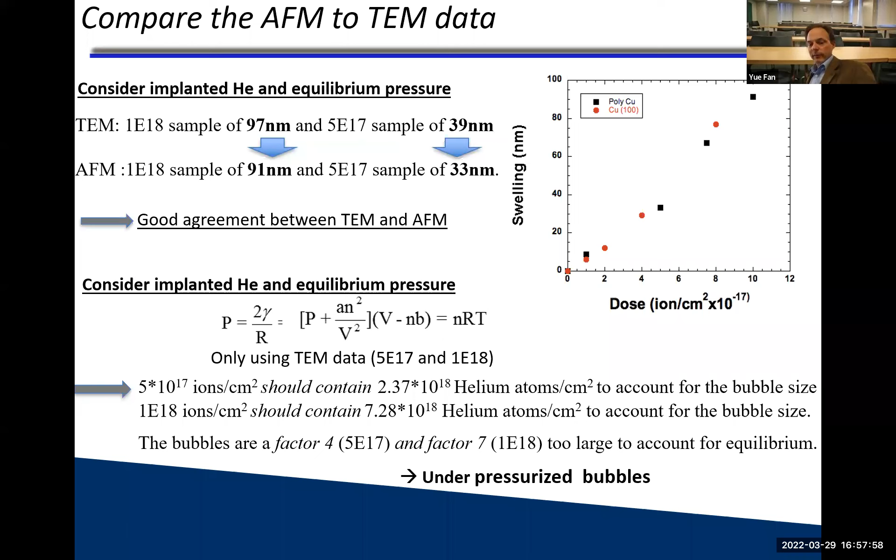Well, why is this? Because at the same time we're pumping in all the helium, we're also pumping in 50 dPa of displacement damage, and we create a lot of vacancies and interstitials at that point. So a lot of that cavity space is actually attributed to the vacancies rather than just the helium itself. So that was kind of interesting to do.

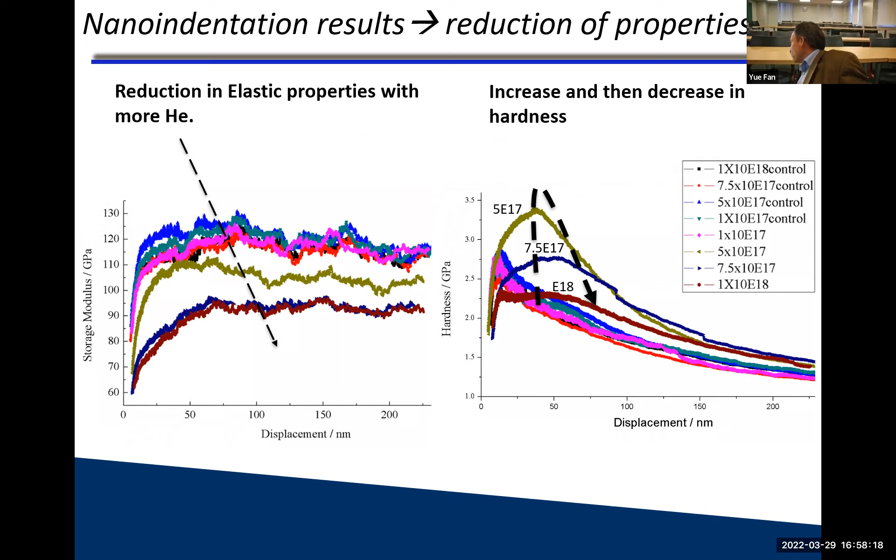Now the nanoindentation is also interesting. So we do indentation, displacement versus elastic modulus, depth versus modulus at different doses, and hardness versus depth as well. As more dose we pump in there - this is unirradiated or control, and this is 1 times 10 to the 18. What we see is the elastic property drastically reduces.

It's not hard to imagine, because now you have all this empty space, it's more like foam-like with this many cavities, so your elastic property is reduced. However, the hardness - this is hardness unirradiated, but as you irradiate, hardness goes up. But then at higher and higher dose, hardness comes down again.

Why is that? Well, first it goes up because even though it creates empty space, there are dislocation obstacles and therefore they're hardening. But at some point, you have more empty space than solid space, and therefore it becomes weaker as a whole structure because it behaves more like a foam. But interestingly, it never quite reaches the level of unirradiated, so it always stays above, even with this much helium in it. So you do still have some remaining hardening at the end of the day.

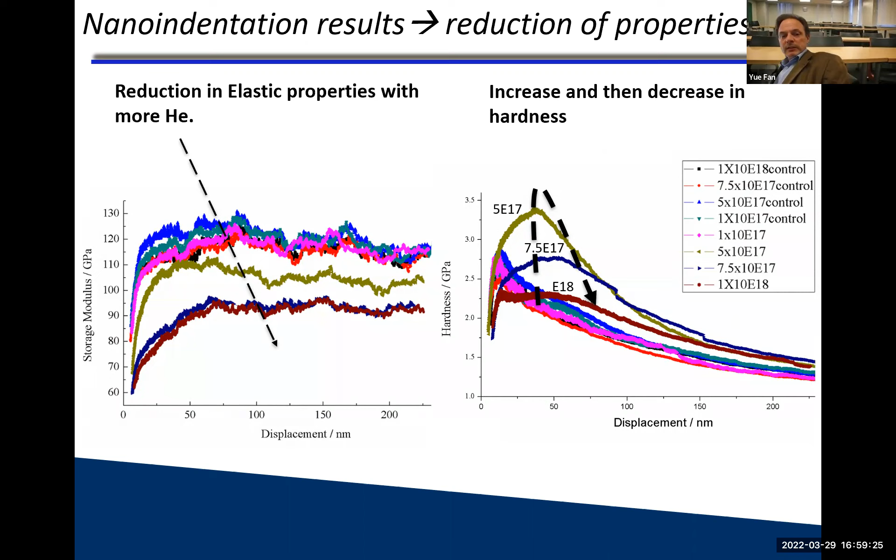Therefore, they have a different surface to volume ratio, and that will lead to the expansion that drives this blistering effect.

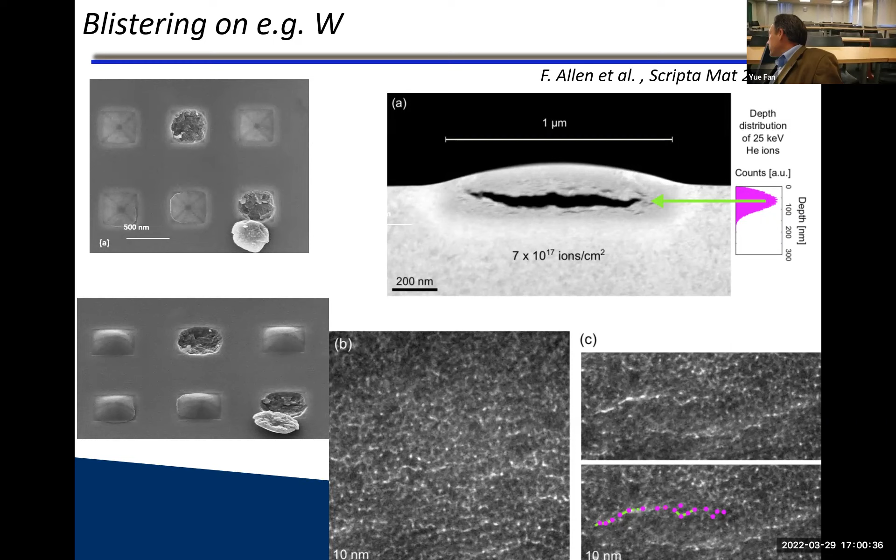You can see very nicely how the helium bubbles start connecting and ultimately form these initial critical cracks. It can be so bad that the whole blisters just simply pop out. We didn't do anything to those - they were just irradiated and they popped out by themselves, kind of like that. So that's pretty nice. And even the tungsten shows this black cross as well - again, single crystal.

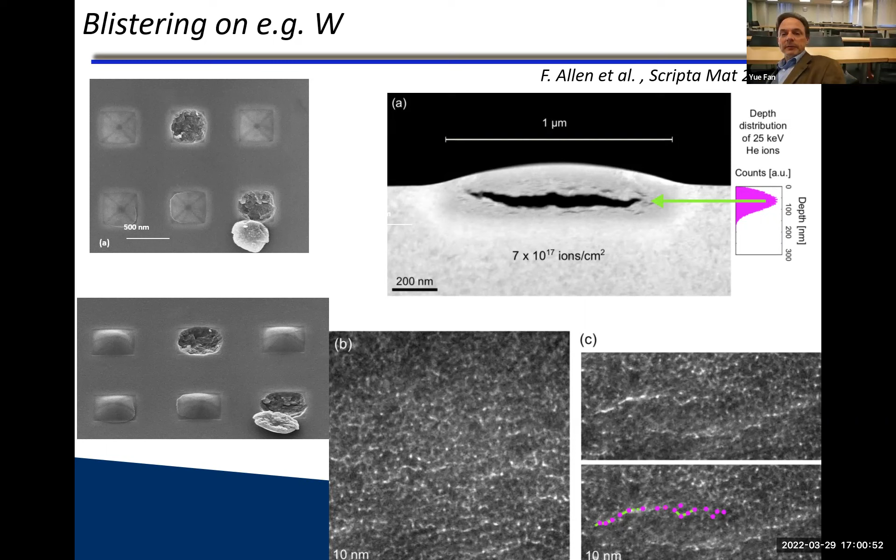Something we did recently is look at these blisters and see what happens when you indent on them - what is the performance of those? Think of a balloon and you start squeezing it - can you say something about the pressure, or what the material does?

Interestingly, first when you indent, you can see where the indent was. A couple of things to note: first, it pops back out, so that's good I guess - like one of those clicker thingies, click, click, click, and then it comes back. The other thing is your blister actually changed shape - the shape afterward is bigger than before. They're not the same shape any longer.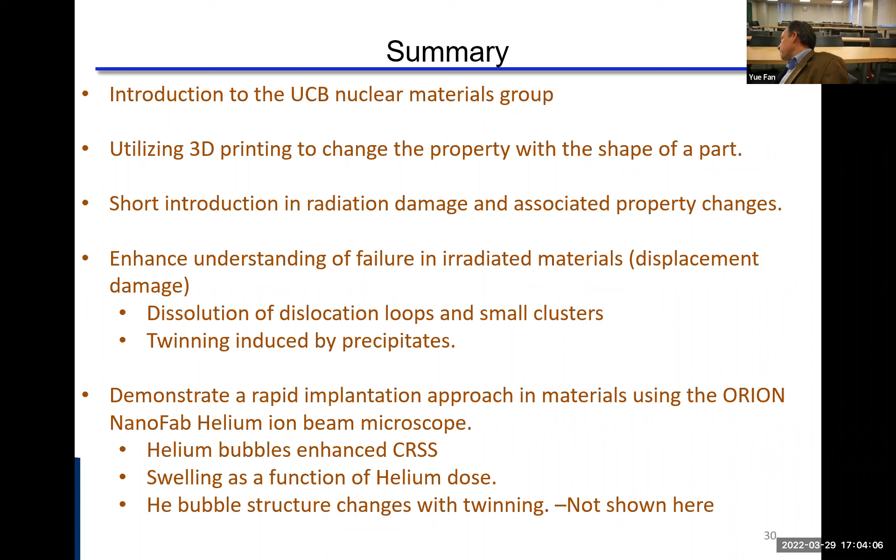So with this, I say thank you for your attention.

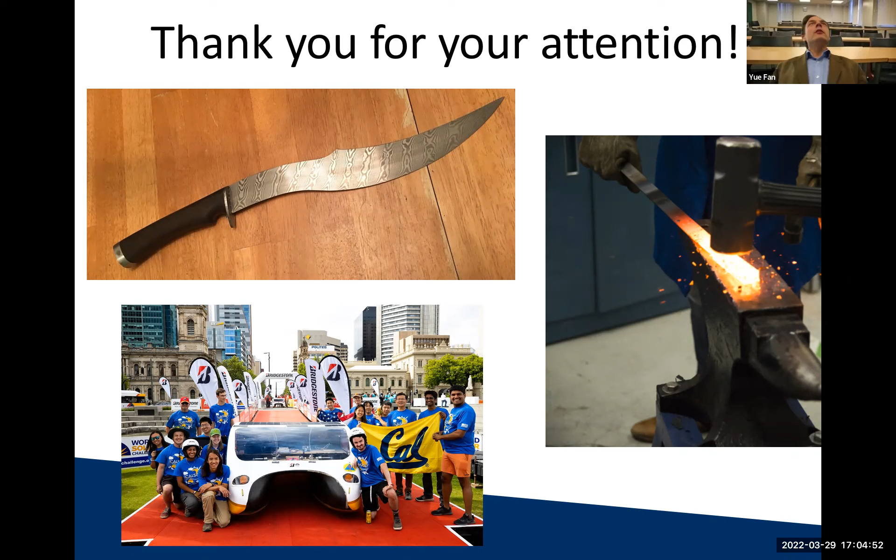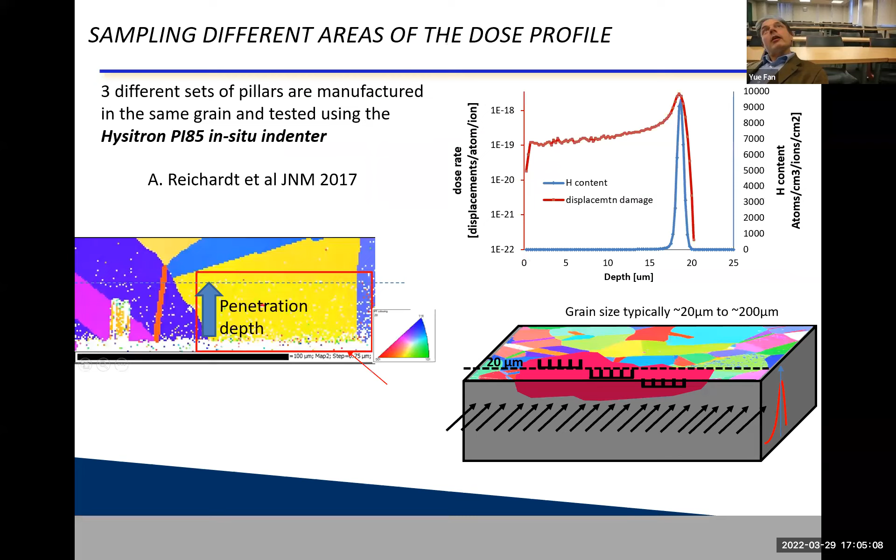Yeah, sure, it's all published. The machine was from RPM in South Dakota. At the time, a few years ago, they had the hoppers and we changed the powder continuously. If the laser power isn't listed here, I can send it to you. I don't remember it off the top of my head, but...

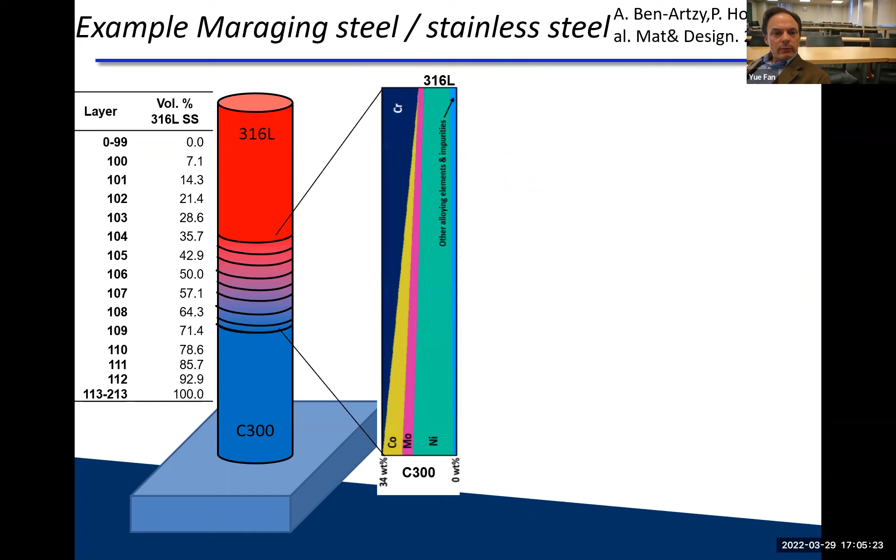It was an argon atmosphere, 1 kilowatt, and a Nd:YAG laser. The actual power setting is in the experimental section of the 2016 paper, so I don't remember exactly—either you download it or I send it to you.

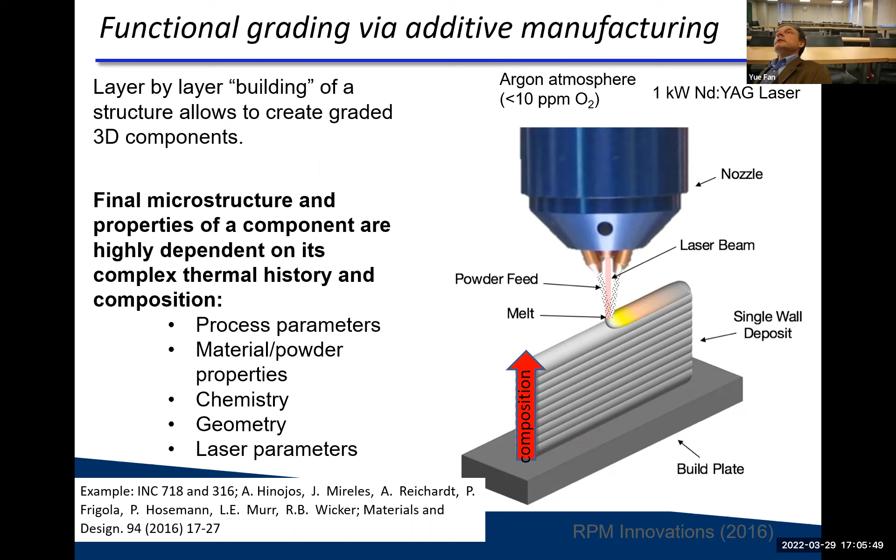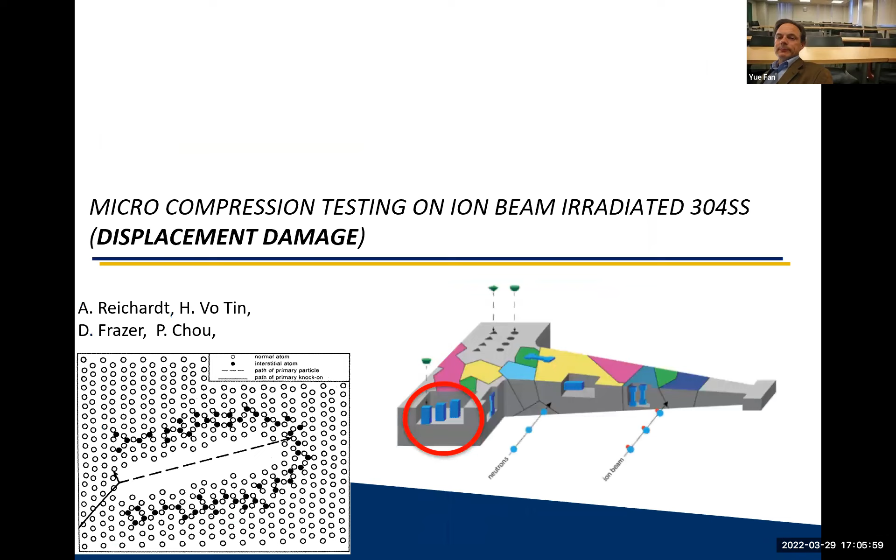You showed that nice round sample with the femtosecond laser—how does it compare with different shapes, square versus rectangle, does it matter? What we found so far is the shape doesn't matter, but the aspect ratio matters. In a round sample, the diameter ratio is obviously 1, but in the flat ones, that's not 1.

If you exceed a certain aspect ratio—I don't want to give the exact number since I'm not sure if it's 5 or 7—your deformation mechanism changes dramatically from necking to a tearing kind of failure, because your stress state changes locally. You can explain that through the surface stress state of the material. So you really need an aspect ratio of no more than 1 to 3 probably, and that's not even talking about microstructure yet—that's just the stress state.

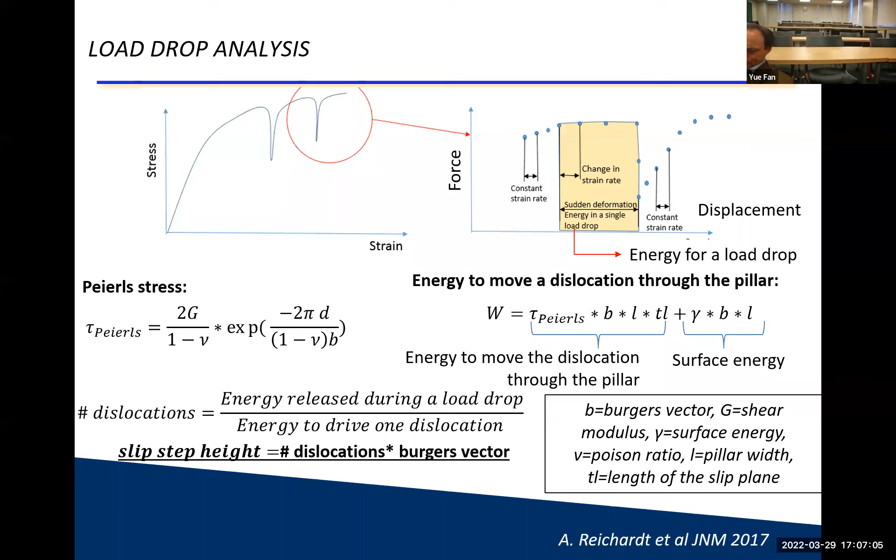This is a typical size effect, which comes from the dislocation density changing during plastic deformation. If your sample gets smaller and smaller, eventually there's no space for dislocations, so it approaches ideal strength. People have shown that whiskers get very close to ideal strength. But then the question is, what's your Schmid factor? If that's different, you get very different outcomes.

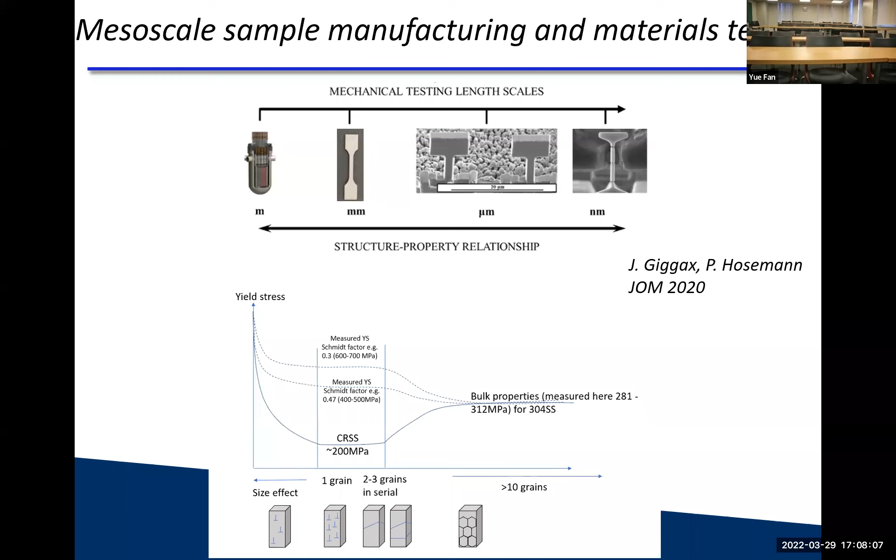But with an irradiated material—not shown here necessarily—you see the strength stays high, because in that instance the strength-determining feature isn't grain size or orientation, it's the radiation effects. We just published work with our colleagues in the UK, Chris Hardie, looking at chromium precipitates in copper, where you can nicely tailor the precipitate density, and if tailored just right, the strength stays pretty much constant all the way.

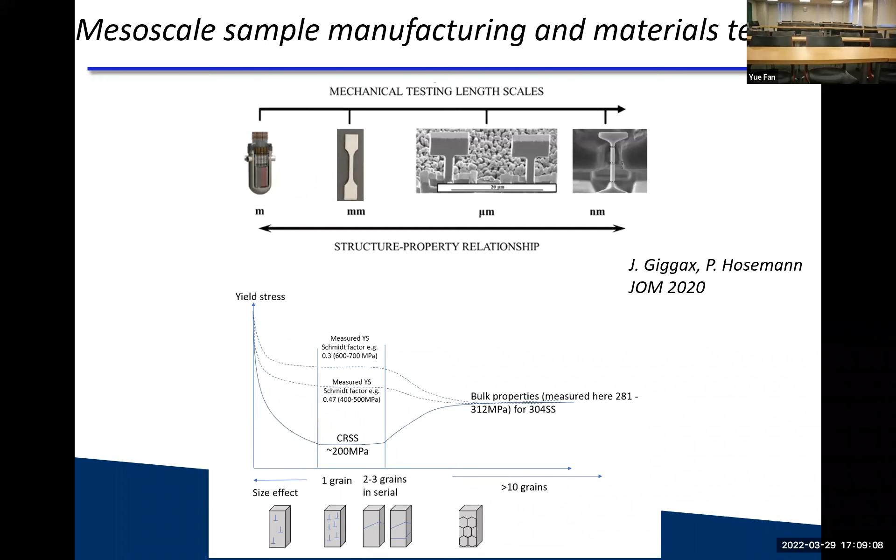If your strength-determining feature is very small, the dislocation density plays no role because that's not the strength-determining mechanism. So you always have to ask what property you want to measure. If you go for grains, there's no way around the Schmid factor challenge, but with precipitate-strengthened or lattice-strengthened materials, you can push this to much smaller length scales. I don't know if that answered your question.

But I guess we were talking about the laser thing, so aspect ratio is what you mentioned. Is there any particular application or property for which you would recommend doing the round test as opposed to rectangle or square? Like, when would you want to take the trouble to make it round?

If I can't make my sheet thin enough, then it's probably better to make it round. The way we make those, we polish them mechanically, and the thinnest you can get is about 30 microns, give or take, which is a bit of a gamble—not every sample succeeds. So if you want smaller than 30 microns or so, I'd probably do it round, because that way I can guarantee it's always 1-to-1.

I think what's the smallest you can make it by hand is probably another way. What I haven't done yet, which I'm very eager to do - we just made about a dozen of those - I want to tensile them with EBSD on, so to speak, and watch the orientation change on the surface.